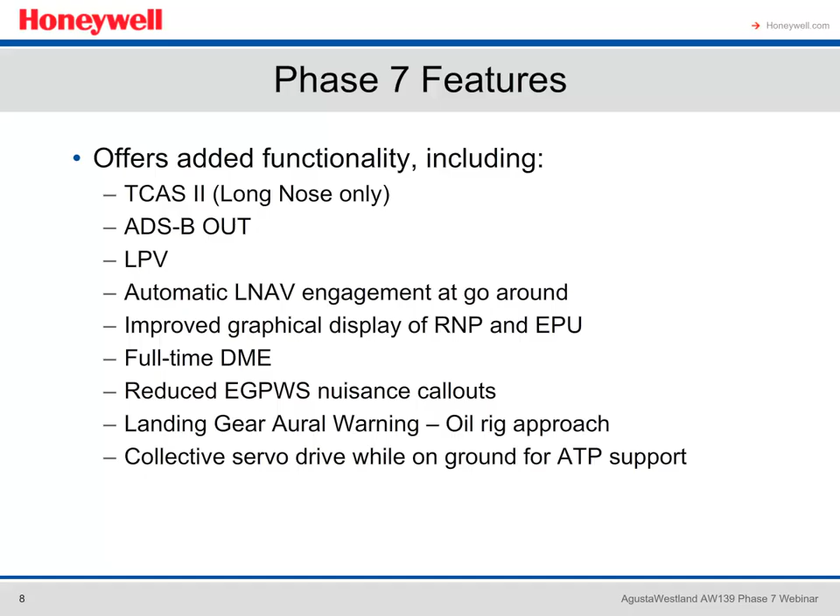Now let's discuss new features as well as improvements with Phase 7. In this section, I'll discuss TCAS 7.1 or TCAS-II, which is an option with the Phase 7 upgrade and only available for the long-nose version. ADS-B out, LPV approaches in general and how LPV is implemented with Phase 7, new Missed-Approach defaults which provide LNAV coupling at go-around, RNP approaches in general as well as what the improved graphical display for Phase 7 looks like, and the Symbology, full-time DME, changes to default callouts for EGPWS, changes to the landing gear aural warning, and changes which will aid maintenance checks by use of the collective on the ground.

Let's start then with TCAS-II, otherwise known as TCAS 7.1. To review, TCAS is an independent airborne system for coordinating traffic separation. It is primarily designed to be a backup to ATC. TCAS detects unsafe traffic conflicts with other transponder-equipped aircraft and displays their symbology on the multifunction display, or MFD. Keep in mind that it only detects other aircraft with transponders installed and on, and therefore will not display any aircraft which is not properly utilizing its transponder. Finally, TCAS-I refers to a system which only displays traffic advisories, whereas TCAS-II provides resolution advisories.

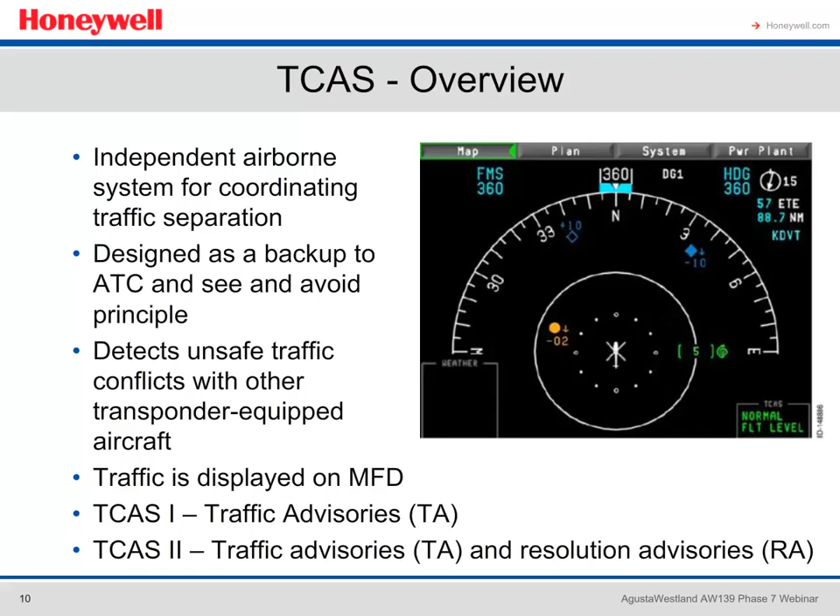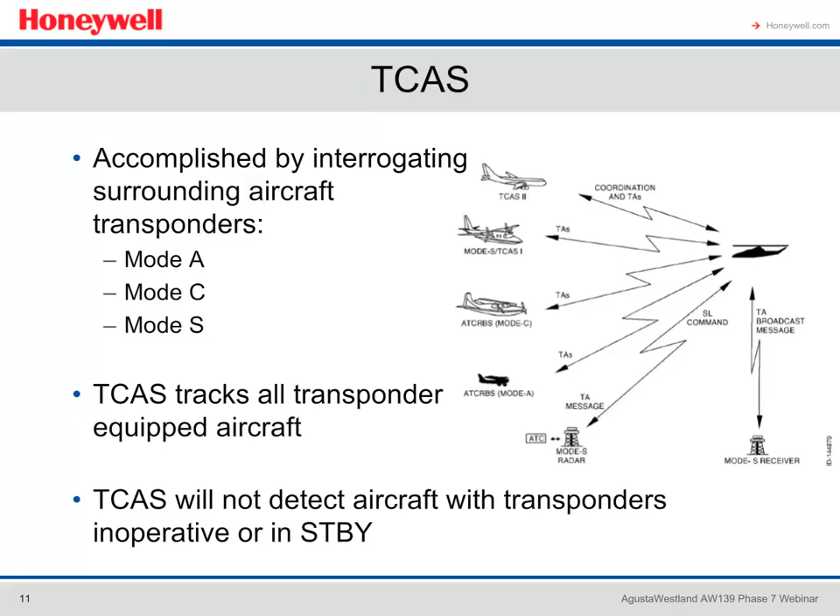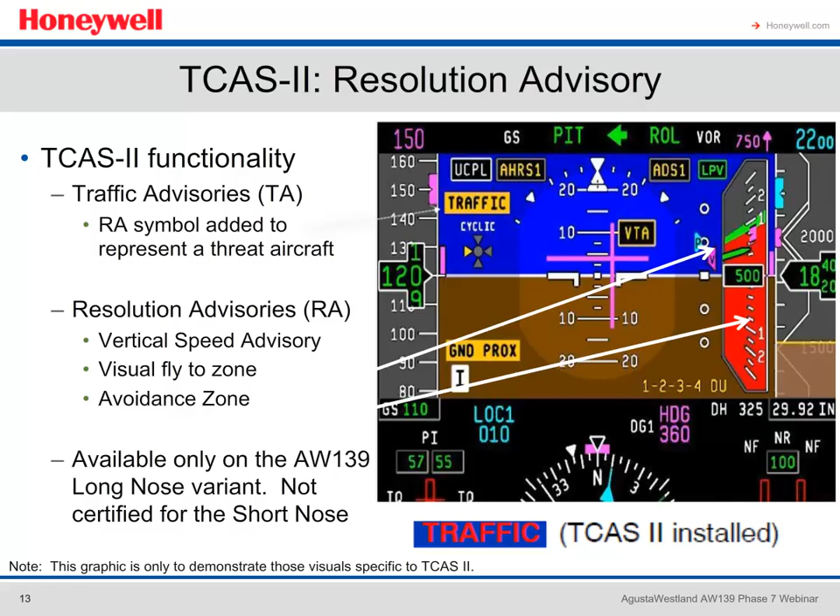Of course, the pilot will still receive traffic advisories and alerts as depicted from TCAS-I. But with TCAS-II, a resolution advisory will be visually depicted in a color scheme on the vertical speed tape to the right of the PFD. The red colored area denotes the avoidance zone, while the green colored region indicates the fly to zone. TCAS-II for the AW139 is only available for the long-nose version, since it is not certified on the short-nose variant.

The vertical speed digital readout is not displayed when a TCAS resolution advisory is present. You probably noted that the previous slide showed both. That's a file photo from our pilot guide and is a demo picture which will show all the PFD advisories in Symbology at once, not depicting an actual scenario.

There are two types of resolution advisories. A preventive resolution advisory instructs the pilot to avoid certain deviations from the current vertical speed. A preventive up advisory displays a red down avoidance zone from the bottom of the vertical speed tape.

A corrective resolution advisory instructs the pilot to deviate from the current vertical speed to avoid the intruder. A corrective down advisory displays a green fly-to band at the down advisory's recommended descent rate, and a red up avoidance extends from the top of the fly-to band to the top of the vertical speed tape.

It is possible to have a preventive down advisory and a preventive up advisory at the same time. For simultaneous up and down preventive advisories, there is both a red up avoidance zone and a red down avoidance zone, with a green space between the two zones which looks like a fly-to band.

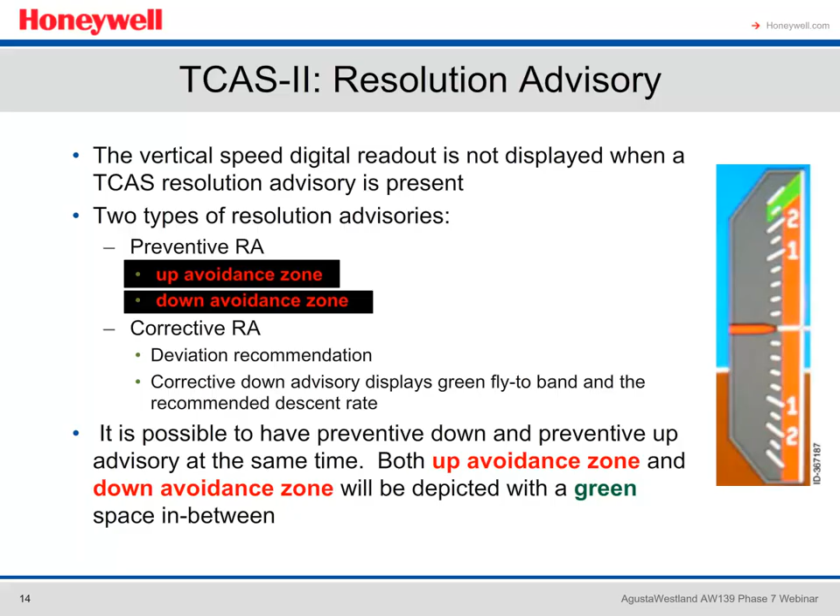When an intruding aircraft is detected, aural and visual traffic advisory alerts are displayed. Traffic is displayed in the upper left-hand corner of the attitude sphere as shown. The traffic display flashes for the first 6 seconds and then shows steadily.

With TCAS-II, alert displays are related to resolution advisories. When a resolution advisory is active, a red traffic annunciator is displayed in the upper left corner of the sphere. With the red and amber traffic annunciators active, the red traffic annunciator is displayed. In other words, the resolution advisory takes priority on the PFD.

When TCAS-II is installed and the transponder mode is TA only, A white TA only annunciator is displayed. When the vertical speed fails, an RA fail annunciator is displayed beneath the other TCAS annunciators. Additionally, if TCAS fails, the amber or red traffic annunciator will not be displayed and the TCAS fail annunciator will appear.

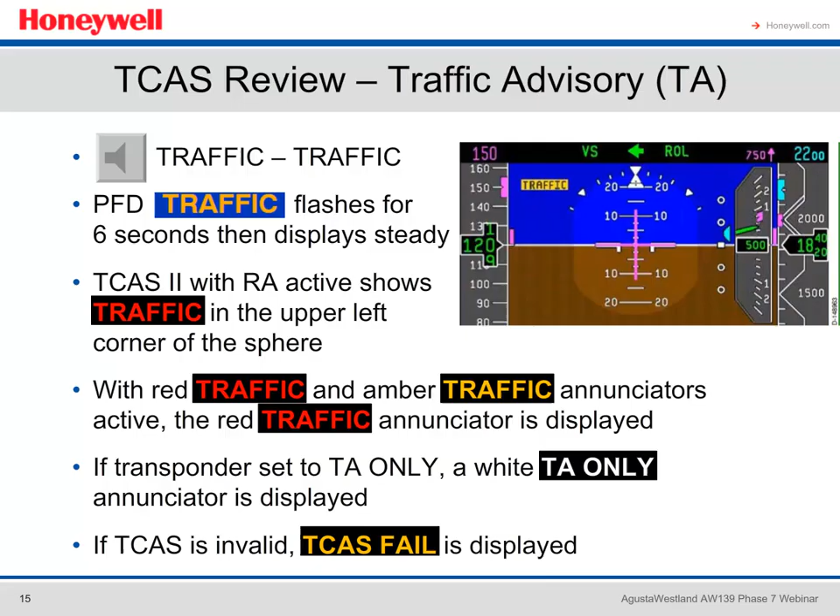Since we're on the subject of TCAS, let's review TCAS in general on the MFD in the next few slides. TCAS traffic settings are displayed in the lower right corner of the MFD map. They provide a TCAS target filter status: normal, above, below, or expanded.

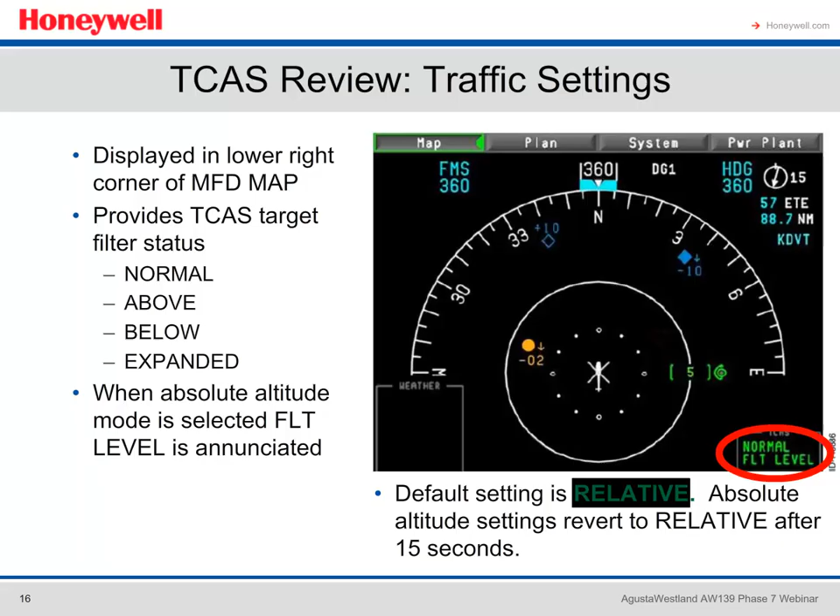When the absolute altitude mode is selected, flight level is annunciated. The default setting is relative. Absolute altitude settings will revert to relative mode after 15 seconds.

When a TCAS traffic advisory is indicated, the cursor moves to the MFD, specifically on the map menu button, and if the map window is opened, a traffic advisory appears as a filled amber circle as depicted.

The 2-mile range ring is displayed when traffic is selected on the MFD. As depicted on this slide, a ring of 12 small circles defines the 2-mile radius around the helicopter icon. Within that 2-mile radius ring are additional dots arranged at each clock hour position.

This graphical TCAS arrangement is removed when the MFD map range is 25 nautical miles or greater. Additionally, for TCAS-II, you will note that the TCAS window does not range in using the automatic scale expansion seen with TCAS-I when the traffic advisory penetrates the 2 nautical mile range ring on the map display. This is intentional and per the requirements of DO-180.

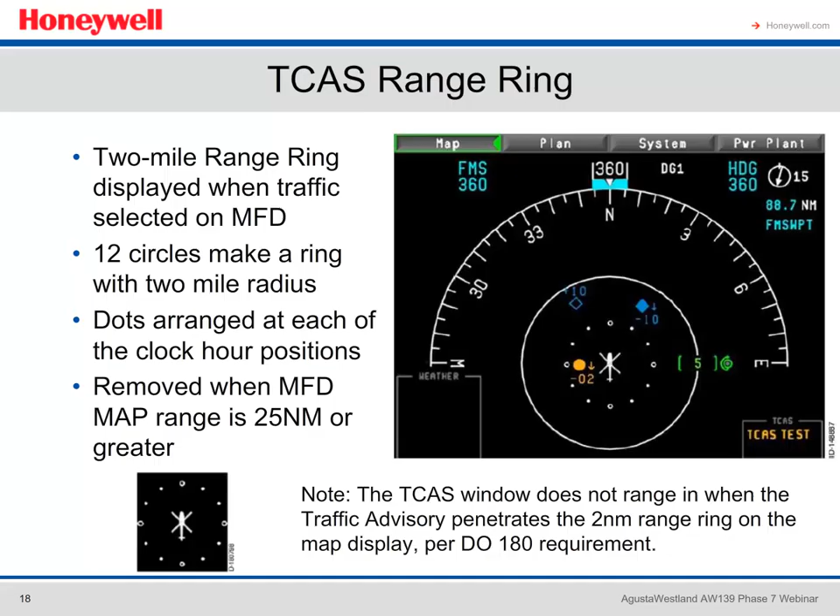Now let's take a quick look at TCAS target type symbology. The orange filled-in circle is a traffic advisory indicating the intruding aircraft is potentially hazardous, with the closest point of approach at 15 to 30 seconds.

The filled-in blue diamond means proximate traffic, or PT, indicating the intruding aircraft is within plus or minus 1,200 feet and within a 5 nautical mile range. Finally, the empty blue diamond means other traffic, or OT, indicating that the intruder aircraft is greater than plus or minus 1,200 feet or beyond a 5 nautical mile range.

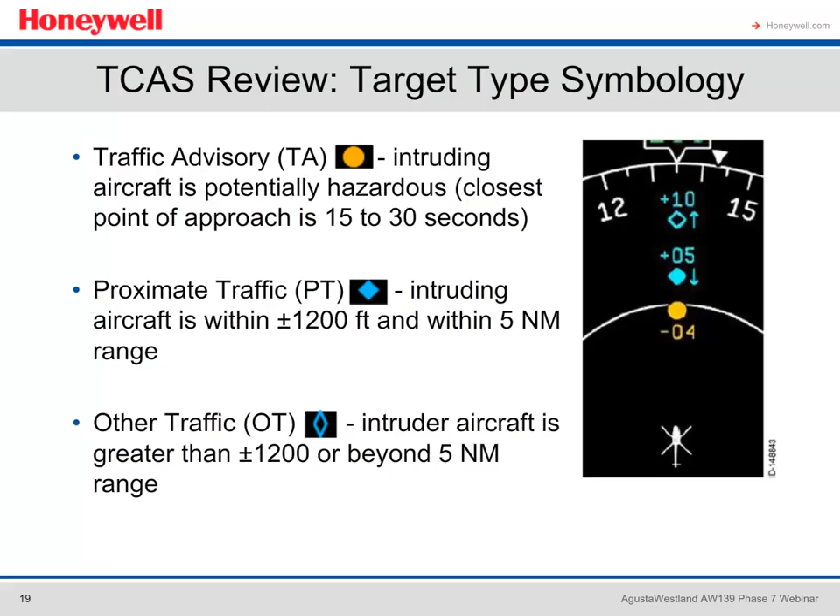A no-bearing target readout will show as amber data located above the TCAS status window. This means that the intruder with a transponder is received, but TCAS is unable to determine the bearing. In the no-bearing target readout, the first line contains the highest priority no-bearing target data, and the second line contains the second highest priority no-bearing target.

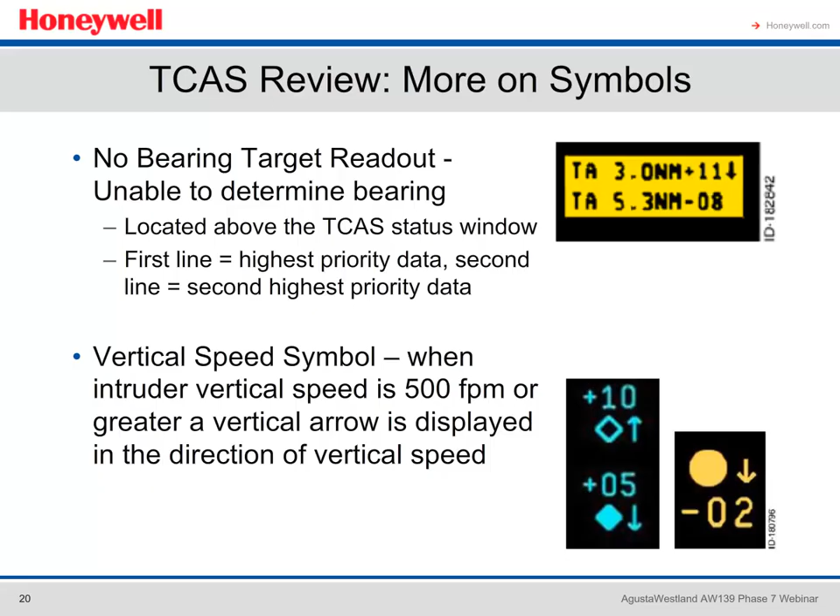Down at the bottom of the slide, we see the vertical speed symbol, which is indicated when the intruder aircraft's vertical speed is 500 feet per minute or greater. This is displayed as a vertical arrow in the direction of the vertical speed. This slide concludes the TCAS portion of this webinar.

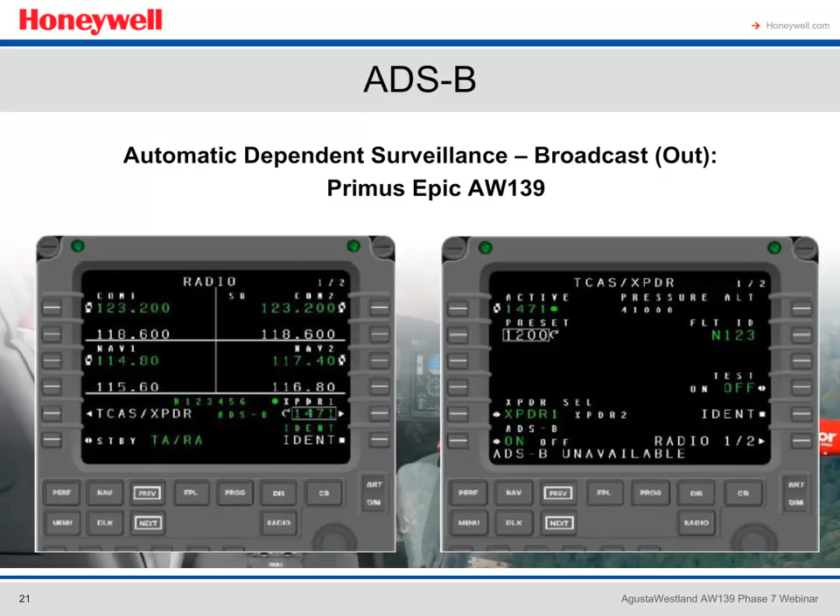So let's now change gears and talk about ADS-B. In Phase 7, the AW139 will be equipped with ADS-B Out. ADS-B Out is part of the FAA's mandates as well as that of many other international regulatory agencies. So in the coming slides, we'll discuss what ADS-B is.

Automatic Dependent Surveillance Broadcast, or ADS-B, is a function that allows an aircraft in the air or on the ground, or for that matter any other vehicles including surface vehicles, oil rigs, etc., to automatically broadcast information without interrogation from a remote source such as radar or TCAS.

It is dependent surveillance in the sense that the information depends on a suitable GPS position source. This information is used by the Air Traffic Management System to surveil and control the aircraft in the airspace. As the name implies, the information being output is continually broadcast to anyone with a receiver. ADS-B Out is the transmission of this information at 1-second intervals.

ADS-B uses a dual link system: UAT, or Universal Access Transceiver, and Mode S, or 1090 ES for extended squitter. UAT is intended for general aviation. It reduces 1090 congestion and the cost of equipage. UAT broadcasts on 978 MHz and is only used in the United States, below 18,000 feet.

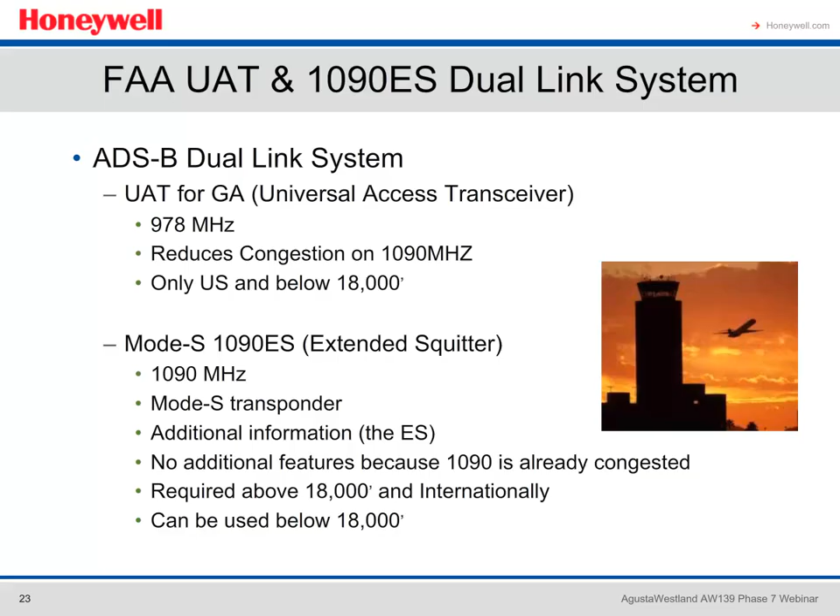The 1090 MHz extended squitter uses the extended Mode S transponder. It can be used in all airspace and will be required above 18,000 feet and internationally. So in summary, the system transmits ADS-B out messages only. It does not receive messages. ADS-B is certified to DO-260B on the AW139 to comply with the FAA 2020 mandate.

ADS-B equipped ATC facilities, using ADS-B in, can see radar-like displays of traffic updates in near real time, and the updates do not degrade with distance or terrain. It provides broadcast data with respect to aircraft position, aircraft state data, and aircraft vector data of high frequency and accuracy over the 1090 MHz transponder, and the only action the pilot performs is to verify the system is on. That will conclude the ADS-B section of this webinar.

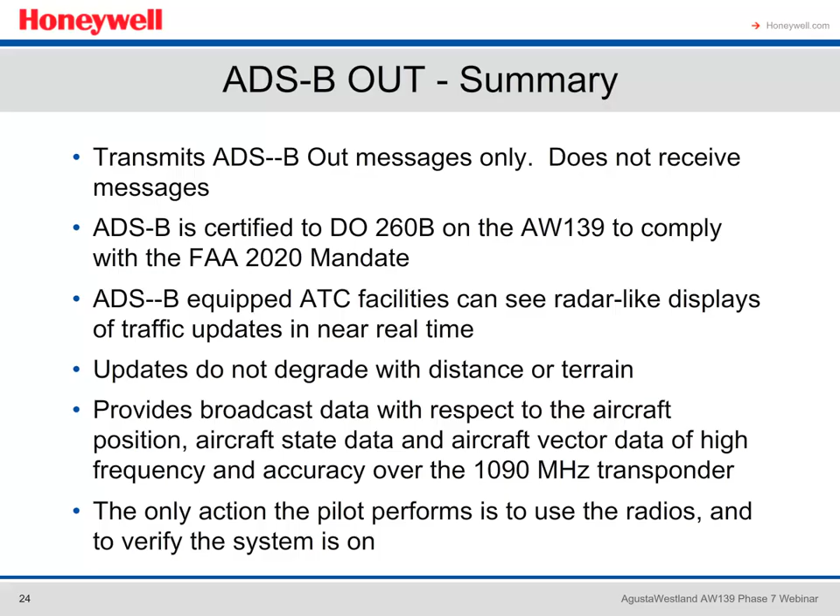In this section, I'm not only going to discuss the LPV capabilities of the helicopter, but provide a brief overview of the system upon which it relies. First, we'll discuss that ground and satellite-based system, then LPV approaches in general, and after that we'll see what they look like in the cockpit as we fly an LPV.

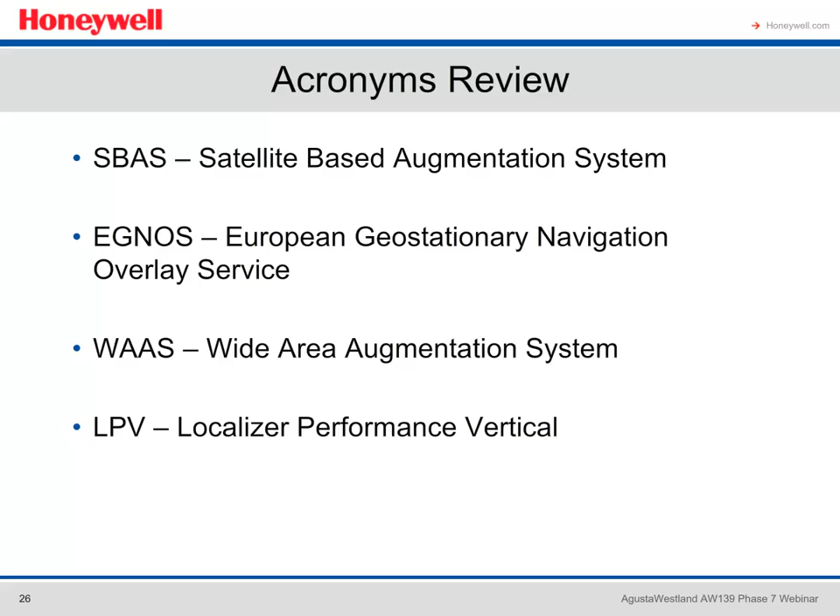So let's look at some important acronyms you'll see time and again. SBAS refers to the Satellite-Based Augmentation System. That is the ICAO term for the regionally specific versions like EGNOS, the European Geostationary Navigation Overlay Service, which is the SBAS for Europe, WAAS, the Wide Area Augmentation System, which is the SBAS for the United States, and of course other regions have theirs, Japan's MSAS for example. Finally, LPV stands for Localizer Performance Vertical.

SBAS, known in the U.S. as WAAS, was jointly developed by the U.S. Department of Transportation and the FAA. It was part of the Federal Radio Navigation Program circa 1994 to provide performance comparable to Category 1 ILS for all appropriately equipped and certified aircraft. The FAA and the aviation community wanted to use the global positioning system for precision approaches, saving money on ground infrastructure and allowing precision approaches to many more runways.

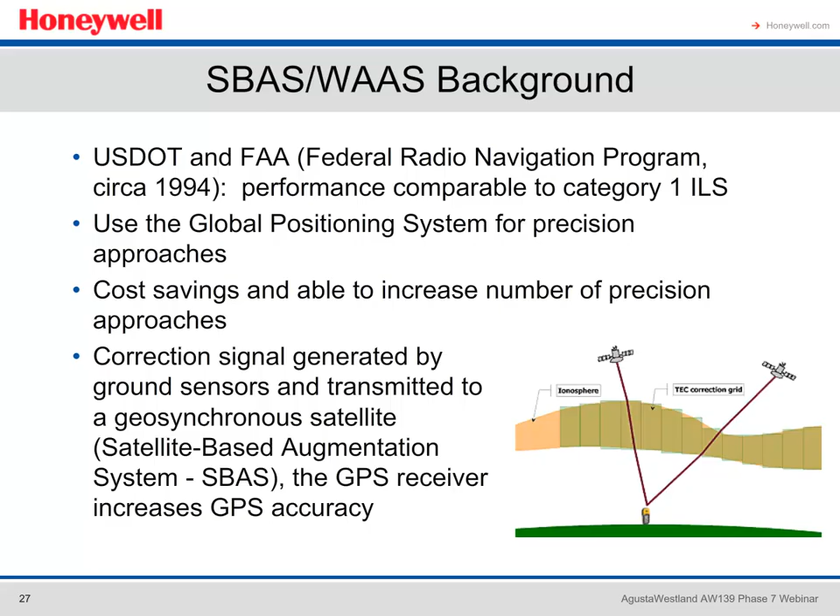To increase the accuracy of GPS in order to support precision approaches, the solution has been to use a correction signal generated by ground sensors and transmitted to a GPS receiver. More specifically, that solution is to transmit the correction signal from a geosynchronous satellite called now a Satellite-Based Augmentation System, or SBAS.

In addition to being able to do RNAV GPS approaches to lower minimums, the other benefits to SBAS include eliminating the predictive RAIM check requirement by EASA's AMC 20-4A and FAA's AC 90-100A. The system is 10 times more accurate than traditional GPS, yielding better position accuracy. The system uses GPS altitude instead of barometric VNAV, which is much more consistent and not susceptible to incorrect altimeter settings, temperature, and altimetry errors. This means the pilot can ignore temperature limitations when conducting an LPV approach.

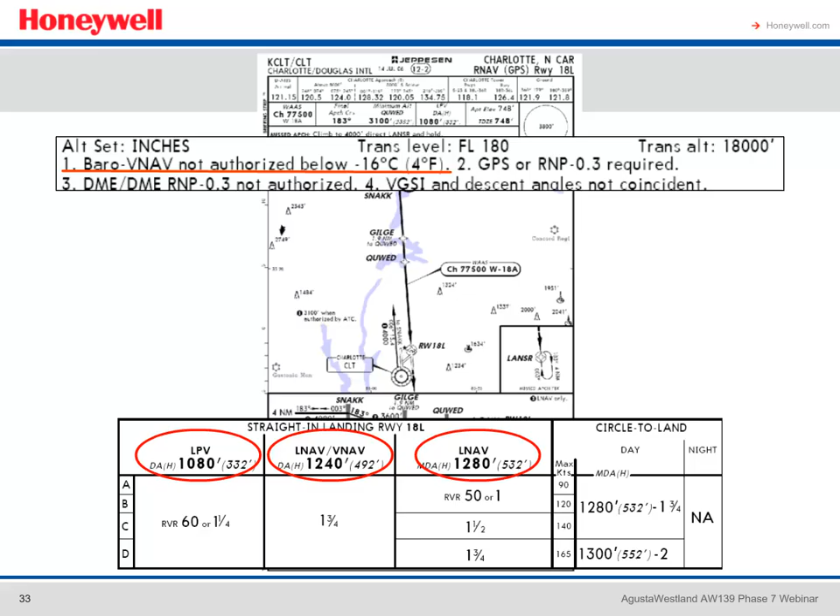Here is an approach plate for Charlotte, North Carolina, RNAV GPS runway 18 left. It shows 3 different published minimums: the LPV, the LNAV VNAV, and LNAV only minimums. In order to use the LPV minimums, the aircraft must be equipped and authorized to use SBAS. If conducting the approach to LPV minimums, the temperature restriction does not apply. If conducting the approach to LNAV VNAV minimums, the temperature restriction for barometric VNAV must be followed.

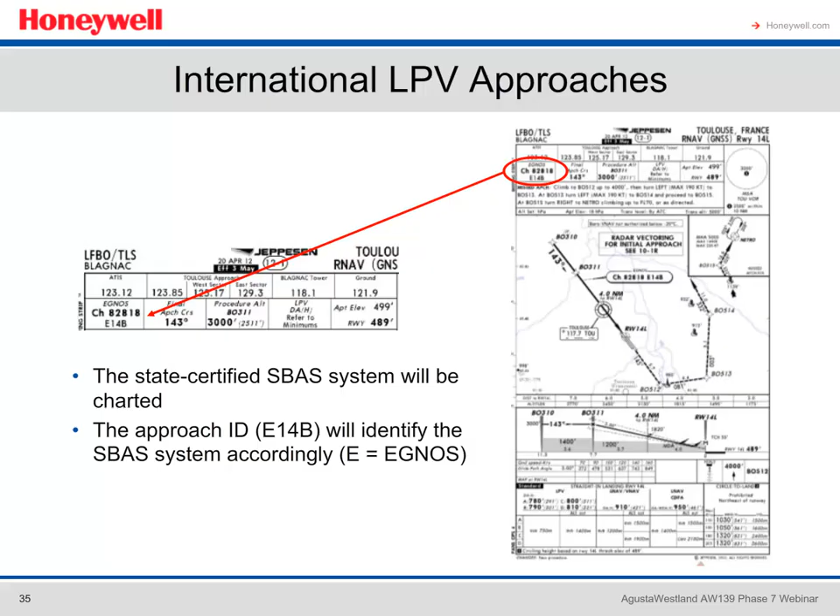Note in this slide of an approach to Toulouse, France, that European GPS approaches with LPV minimums will have slightly different formatting, but the LPV nomenclature will be consistent.

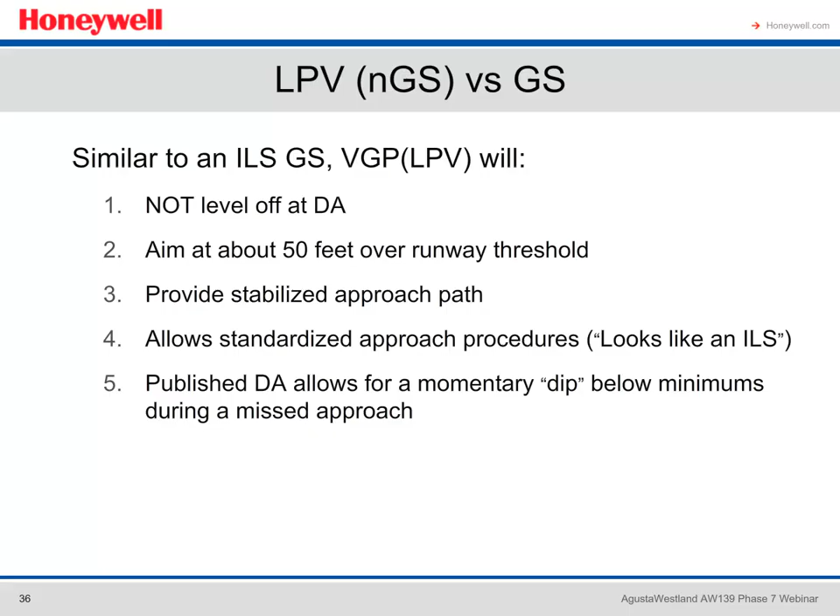The VGP LPV is very similar to an ILS glide slope. Just like the ILS, VGP LPV glide slope, known as the NGS or pseudo glide slope, will not level off at decision altitude. It'll aim about 50 feet over the runway threshold. It will provide a stabilized approach path. It allows standardized approach procedures and looks like an ILS, and has a published decision altitude which allows for a momentary dip below minimums during the missed approach.

LPV approaches in general allow for the following capabilities. They provide the highest precision GPS SBAS enabled instrument approach procedures currently available without specialized aircrew training requirements, such as the RNP AR. The landing minima are similar to those in an ILS, with a decision height of 200 feet and visibility of a half a mile.

The landing minima are similar to those of an ILS, with a decision height of 200 feet and a visibility of 1/2 mile. And they are designed to provide accuracy of 2 meters and availability above 99%.

Now let's talk about LPV approaches in the 139 specifically. The following are some key points about setting up an LPV in the AW139. As you will see, when selecting RNAV approaches in the FMS, LPV is the default approach minima type. The FMS navigation database contains the final approach segment, or FAS, data block associated with the LPV minimums.

That FAS data block is transmitted from the FMS to the GPS SBAS landing system sensor unit, referred to as the GLSSU. It computes aircraft lateral and vertical deviations for the final approach segment. With LPV enabled, the GLSSU displays LPV deviations and distance to the landing threshold point, or the LTP, on the primary flight display known as the PFD, and provides such information to the flight director in lieu of ILS guidance.

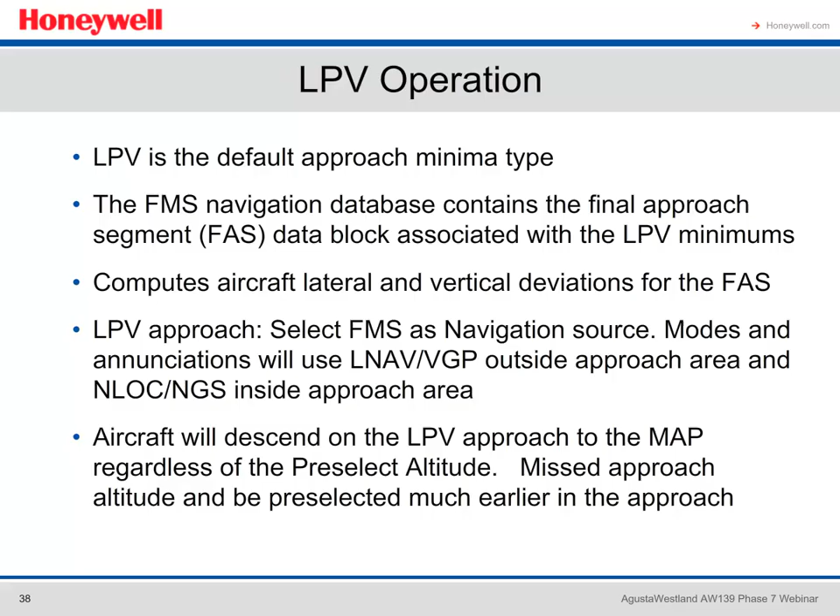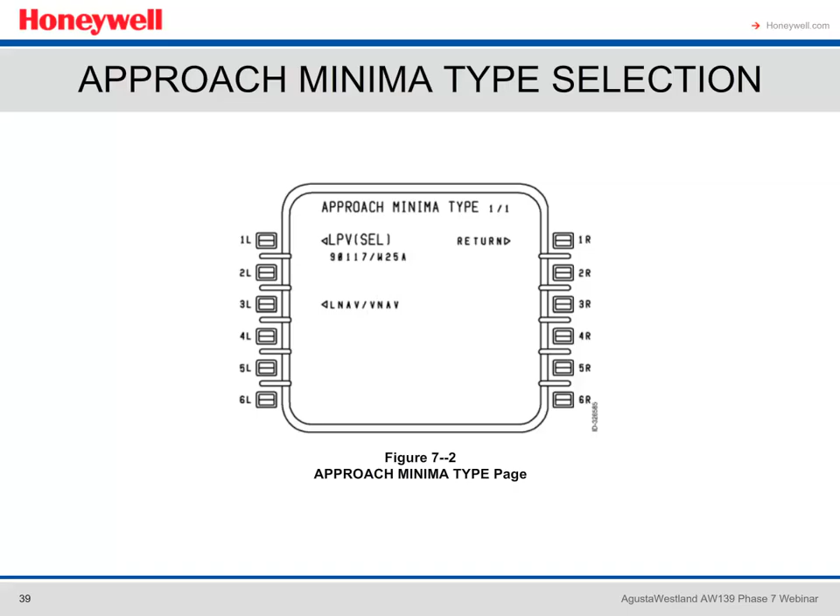Now let's take a brief look at setting up the approach. As mentioned earlier, and as you can see in Figure 7-2 from the AFCS Pilot Guide for the AW139 Phase 7, when selecting RNAV as the approach type, the approach minima type page will show the LPV option as the default under line select key 1L.

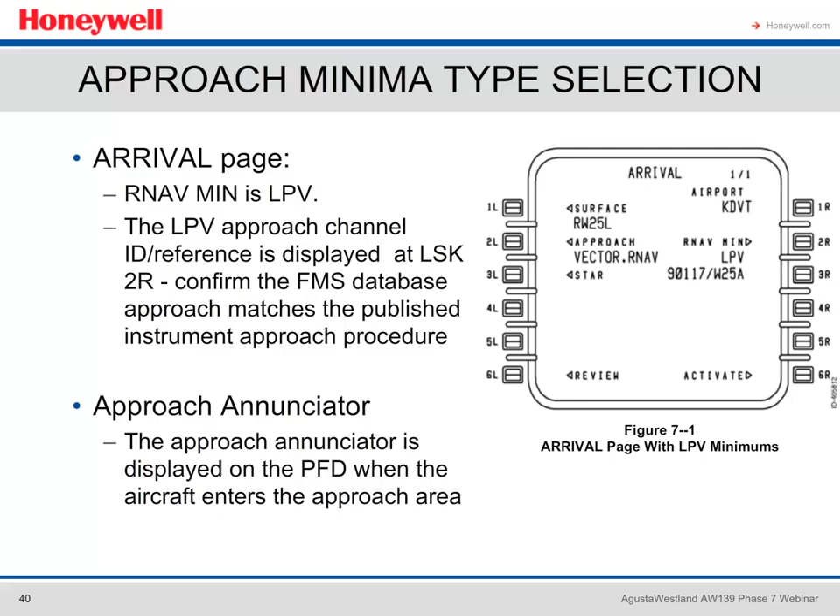As you will see in the coming slides, the approach annunciator is displayed on the PFD when the aircraft enters the approach area. We'll cover setting up the LPV approach again once we get to the section of flying the LPV, but first, let me go through some more information about how the LPV works with this aircraft.

The LPV uses GPS data for both lateral and vertical guidance. As shown previously, select the LPV approach on the FMS. As with other approaches on this FMS, you must select either approach or DCL on the guidance controller in order to arm the approach.

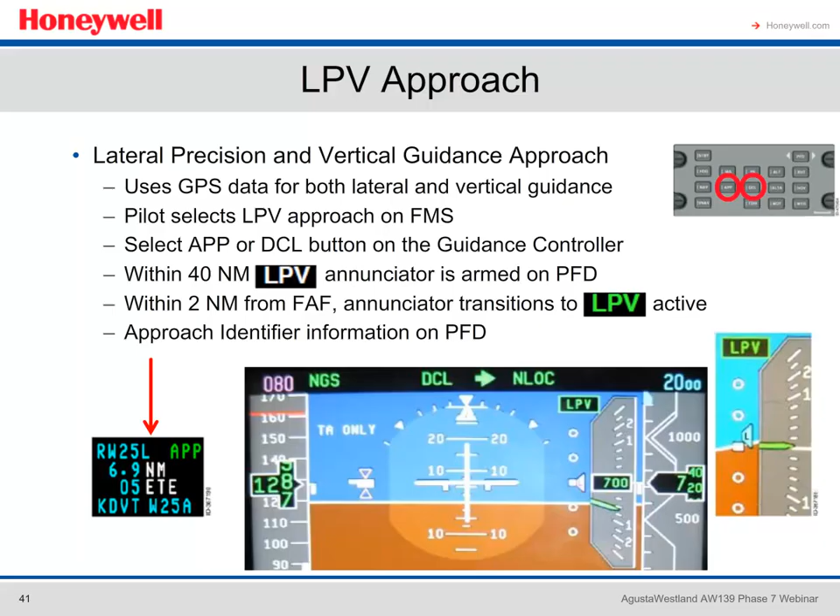Within 40 nautical miles, the LPV annunciator is armed on the PFD, showing white letters on a black background. Within 2 nautical miles from the final approach fix, the annunciator transitions to LPV Active, indicated by green letters on a black background. Also note the approach identifier information on the PFD. It's another opportunity to confirm you have the correct approach programmed into the FMS.

Let's do a quick look at the approach indications and related parameters. You'll see the color coding is consistent with other approach modes. The LPV is armed, indicated by white letters, when the aircraft is within 30 nautical miles of the landing threshold.

There is a valid final approach segment, or FAS, data block loaded into GPS, and the related SBAS system is operational. LPV is active, indicated by green, when a valid final approach segment data block is loaded in one of the 2 GPSs and the FMS is using GPS calculated final approach segment deviations to determine guidance.

LPV is unavailable, which is indicated by amber, up to 30 nautical miles of the landing threshold when conditions exist that would prohibit descending to LPV minimums during an approach. The following are conditions that can cause it to activate.

A warning of a loss of SBAS corrections after the LPV approach has been loaded, or warning of excessive lateral or vertical deviation, which is 2 dots, from the approach flight path after passing the final approach fix. An LPV unavailable CAS message will appear if the system is unable to perform the LPV.

The white LPV symbol indicates the system is sourcing information from the FMS for navigation. The green LPV symbol indicates sourcing from the GPS. And the amber LPV symbol indicates the system is unavailable and is sourcing the FMS for all information.

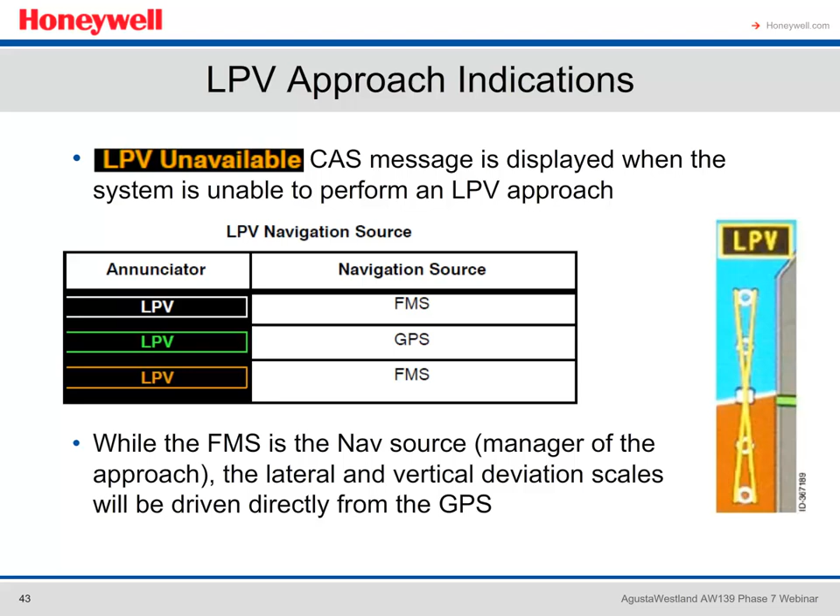If the LPV sourcing data is lost, you'll see an LPV unavailable CAS message, amber LPV display on the PFD, and an amber X on the right side of the PFD as depicted.

Once the aircraft is within 2 nautical miles of the final approach fix, the LPV Active or green annunciator appears on the PFD. Lateral and vertical deviations now change from FMS to GPS source pseudo ILS deviation signals.

NLOC, or the pseudo localizer, is annunciated as the lateral flight director mode. The NLOC mode arms after LNAV is captured and localizer capture criteria is met. LNAV disengages and NLOC transitions from armed to captured.

The approach annunciator, APP or DCL, is displayed to the right of the waypoint identifier. And finally, a small L is displayed inside the vertical deviation pointer showing the aircraft on the glide path, similar to an ILS glide slope.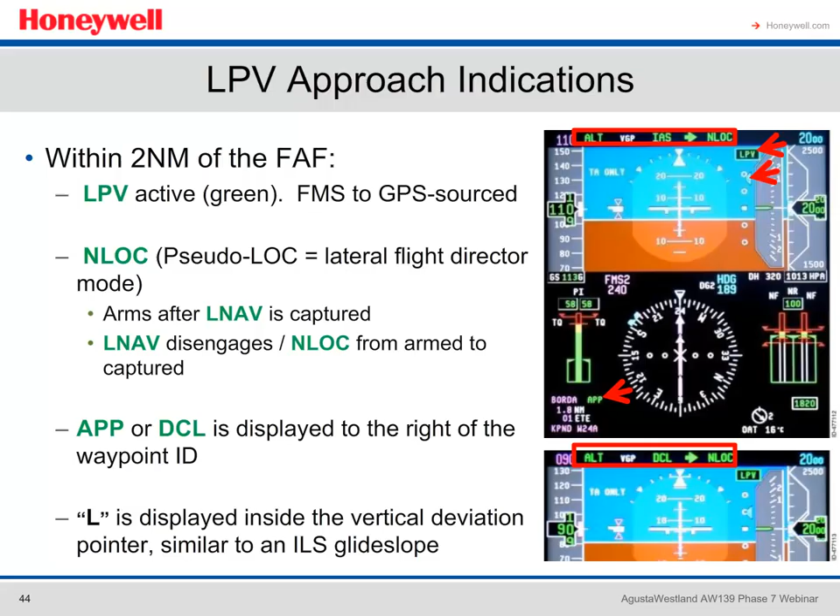NGS, or the pseudo glide slope, is the active collective flight director mode when the following occur: when NLOC is captured, when the glide slope capture criteria is met, and after VGP disengages.

As the LPV approach continues and the aircraft approaches the runway threshold, a transition to a radio altitude of 50 feet is initiated and a 50-foot hover is held.

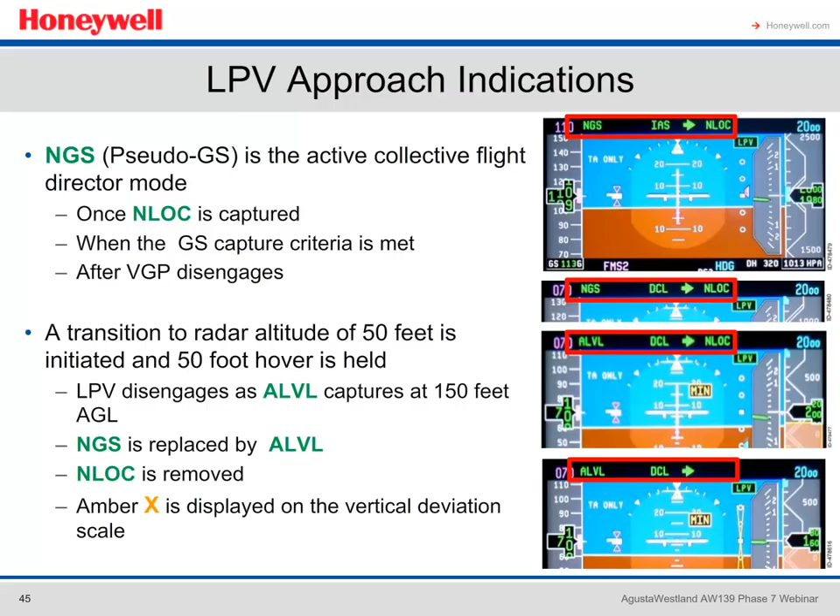When the flare maneuver has begun, LPV is disengaged as auto level captures at 150 feet AGL. NGS is replaced by auto level. However, you'll normally see NLOC disappear at about 70 to 80 feet AGL. And finally, an amber X is displayed on the vertical deviation scale.

Concerning LPV abnormal indications: if the GPS is unable to perform the approach, the LPV annunciator is replaced with an amber LPV. An amber X is displayed on the vertical deviation scale as well, and the airport ID and approach ID will flash amber. In the slide example, you can see the WAAS identifier W24A to the right of the airport identifier KPND, and a CAS message indicating 1 or 2 LPV unavailable is displayed.

In this case, the flight crew should either terminate the approach or, if in the terminal area, change the approach minima type to LNAV VNAV and use LNAV VNAV or LNAV minimums as appropriate, or choose to fly another approach. Note that the 1 or 2 LPV unavailable CAS message is not displayed below 80 feet AGL.

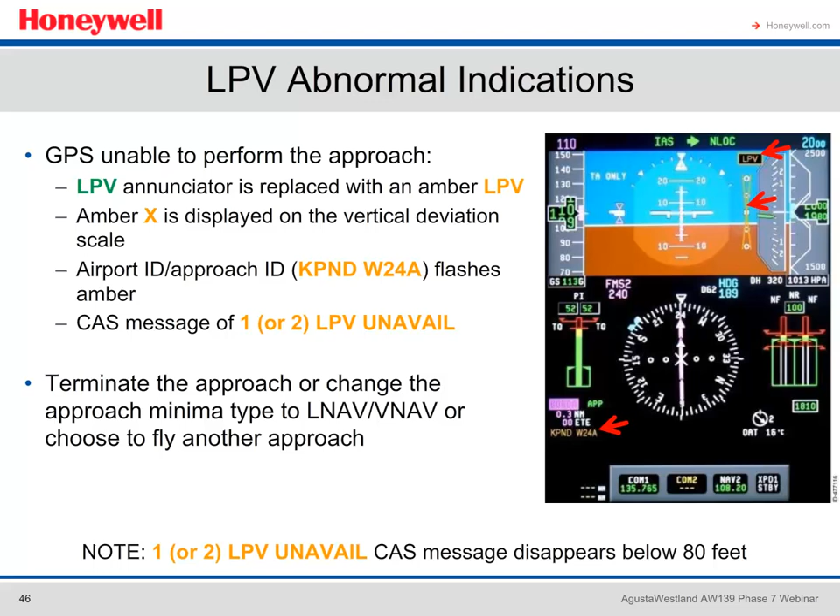For a missed approach with LPV, the pre-select altitude can be set to the first missed approach procedure altitude, and the aircraft will descend to the missed approach point without pilot input. As I mentioned previously, the LPV vertical guidance comes from the final approach segment data block.

Activating missed approach automatically engages LNAV and is initiated by either pushing the go-around button on the collective control grip, selecting missed approach on the CDU, or inputting a direct-to for a non-approach waypoint.

Following a missed approach command, the LPV annunciation is removed and the airport ID and approach ID are replaced with the RNP value, and the lateral and vertical deviation pointers are sourced from the FMS.

Now I'll go through setting up an LPV approach and demonstrate what you will see on the primary flight display as the aircraft captures the VGP. Within 2 nautical miles of the final approach fix, VGP drops and LPV is captured.

In our scenario, we're going to fly an LPV approach to Deer Valley, or KDVT, specifically the RNAV GPS to runway 07 right. Here are the approach details. The LPV minimums are 319 feet AGL or 1779 MSL.

We are to be no lower than 3,900 feet MSL at BOLES, and we will follow the glide slope no lower than 2,900 feet MSL at CEGAP, the final approach fix. That means we should be on a VGP coupled approach until approximately 2 miles from CEGAP, the final approach fix.

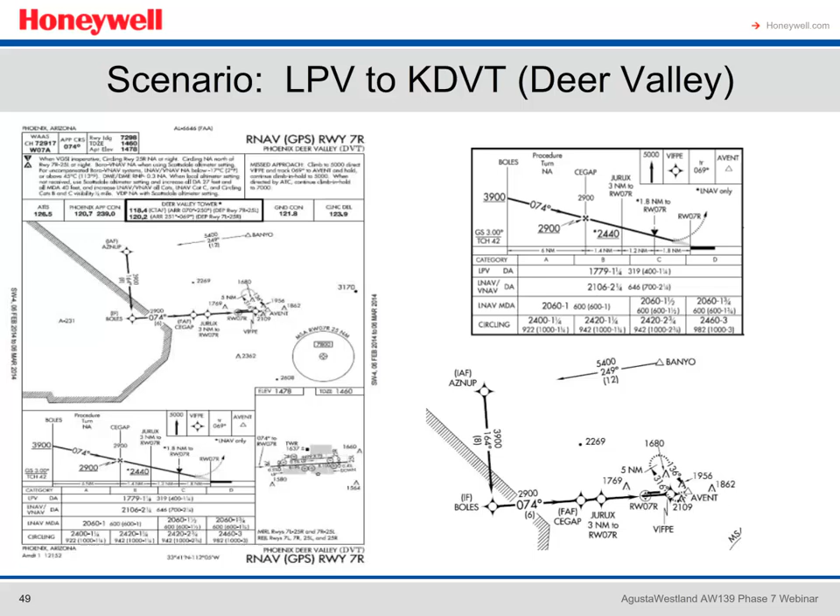This is when you will see the LPV become active, along with NLOC and NGS as VGP and LNAV drop off. Also note from the missed approach procedure that 5,000 feet MSL is the first published altitude.

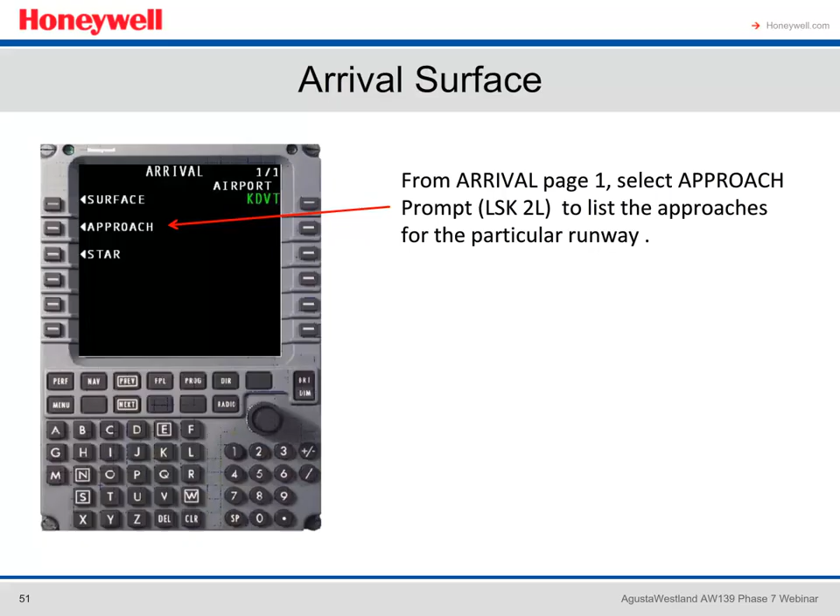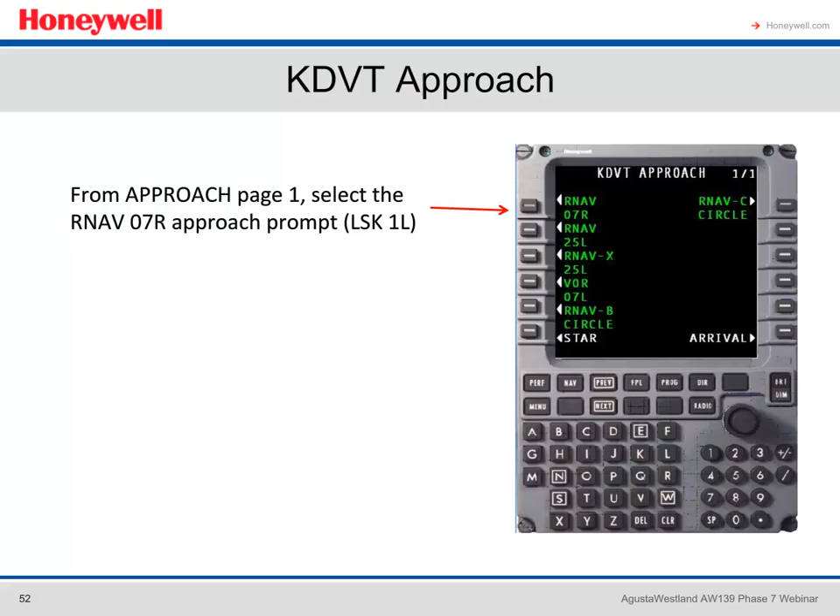Setting up this approach, select Arrival from the nav page 1 of 2 on line select key 6R. Next, from the Arrival page, select the approach prompt at line select key 2L as you confirm you have the correct airport KDVT selected. In the approach page, you see RNAV 07 right in line select key 1L, which is the approach we want to fly for this demonstration.

On the next page, select the point of transition for RNAV 07 right. In this case, we want to select Banyo, line select key 2L.

Finally, select Activate. Note that anytime you have programmed an LPV approach, it is shown first under the RNAV minimums option prompt at line select key 2R. If LNAV or VNAV are preferred, line select key 2R would allow you to change from LPV to another approach minima.

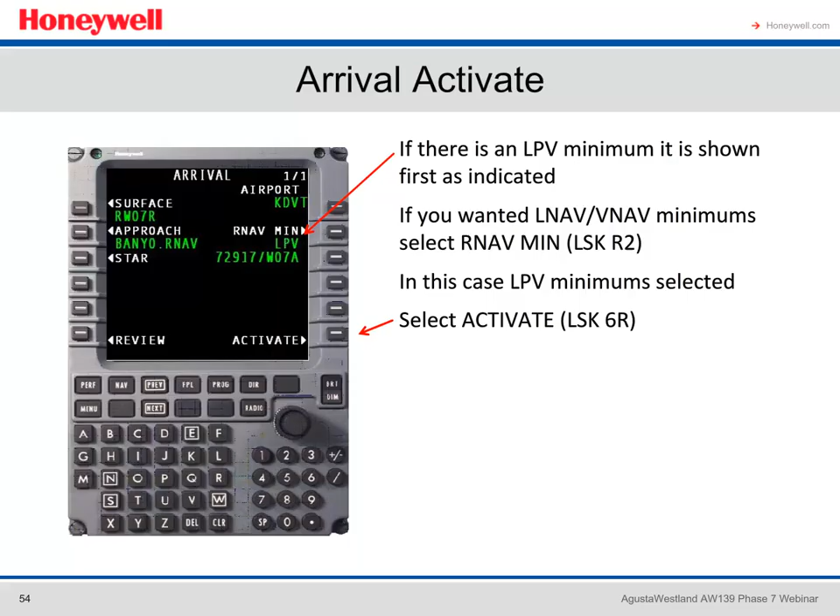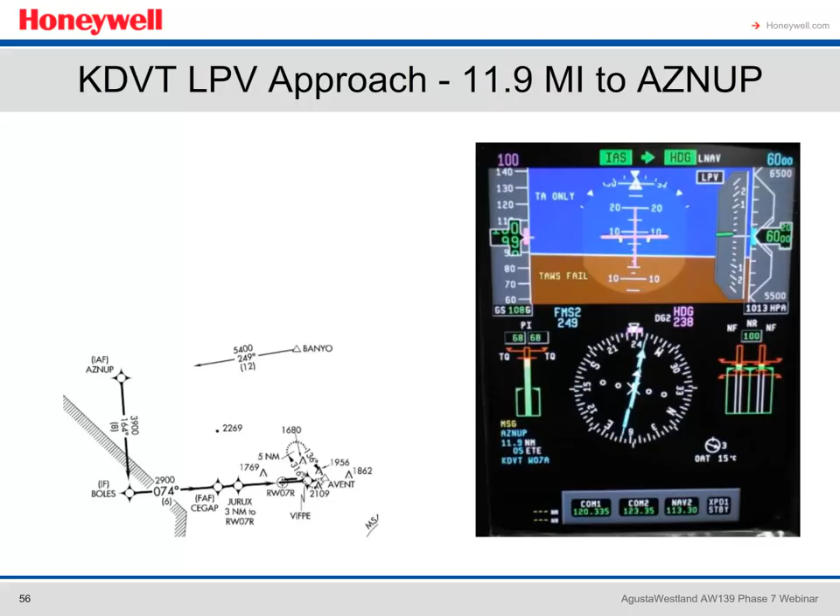Starting out, the aircraft position is 11.9 nautical miles from AZNUP, which puts us just 0.1 nautical miles from Banyo. The cruise altitude was 6,000 feet, and you can see LPV is armed. Airspeed is at 100, and the aircraft will have decelerated to 90 indicated airspeed for the approach. Also note the airport WAAS identifier to confirm again we are on the correct approach.

The aircraft is now 6.8 nautical miles from Boles, and VGP is now armed. LNAV is active, and the airport WAAS identifier information at the lower left of the PFD has turned magenta, confirming the approach is now active. The airspeed is 90 knots, and altitude still at 6,000 feet.

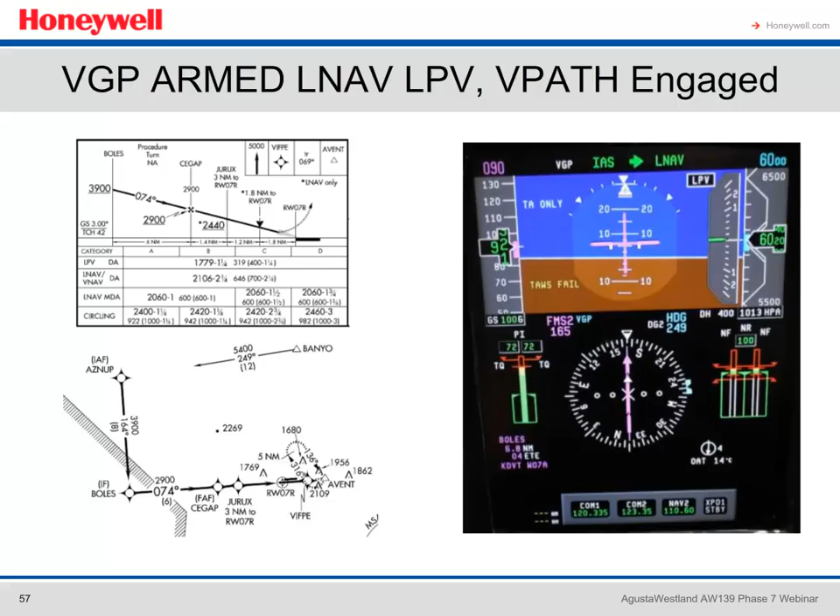As you can see, a decision height of 400 feet AGL has been dialed into the decision height window. Now with the aircraft exactly 6 nautical miles from the final approach fix, CEGAP, VGP is captured, which means the system is now vertically coupled. The system will bring the aircraft into an eventual 3-degree descent on the glide slope.

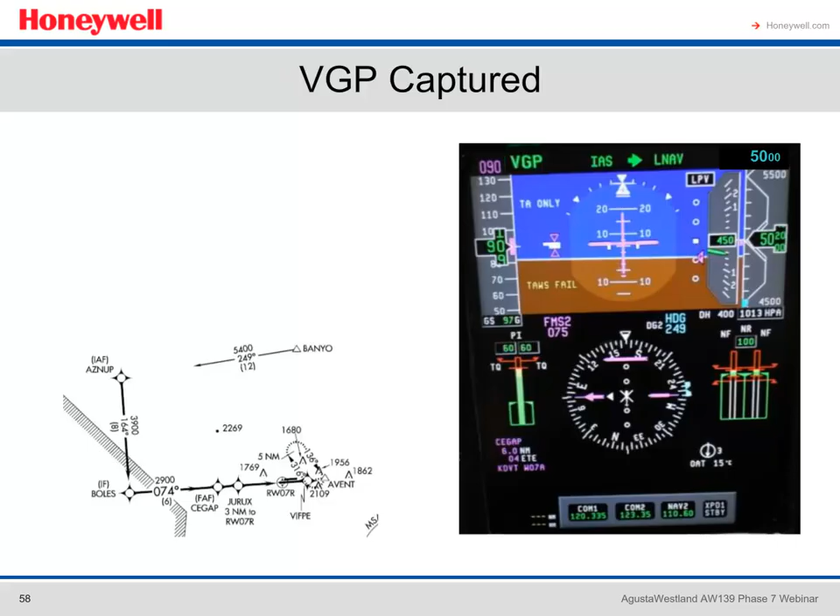The pre-selected altitude can then be set to 5,000 feet, which is the first altitude of the published missed approach. The glide slope indicator now shows a magenta P, and we're descending 450 feet per minute through 5,020 MSL. Having just passed Boles, the aircraft will soon turn left to 074 degrees to CEGAP.

At less than 2 nautical miles, actually 1.8, to the final approach fix, we now see by the reverse video LPV symbol indicating that LPV is in the process of capturing, as is NLOC, the GPS-driven localizer. The glide slope has now converted from VGP magenta, or captured P, to a magenta, or captured L, to indicate the data is now derived from the LPV and the final approach fix database.

Altitude is now 3,420 feet MSL as we continue our descent at 500 feet per minute. A few seconds later, as we have only advanced 0.1 nautical miles, we see LPV captured and VGP is now replaced with a reverse video of NGS.

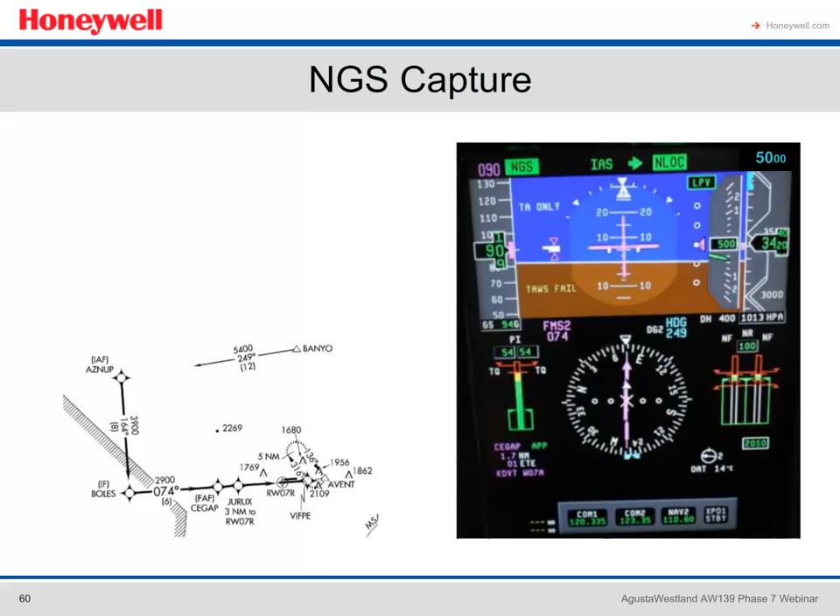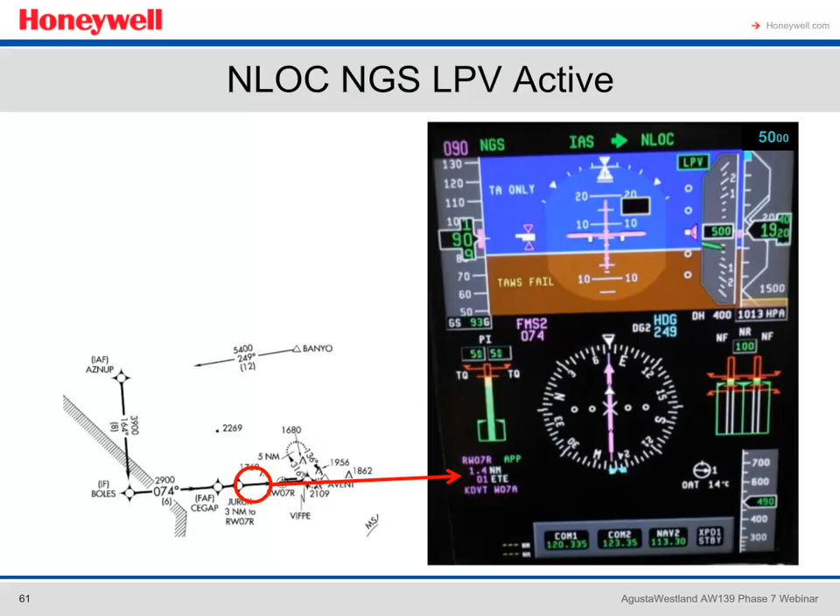0.3 nautical miles later, you can see the PFD with LPV completely active, showing NLOC, NGS, and LPV. As the arrow shows from the diagram, we are now 1.4 nautical miles from the threshold and at the published decision height of 400 AGL. After another only 0.3 nautical miles, the aircraft is 1.1 nautical miles from the runway.

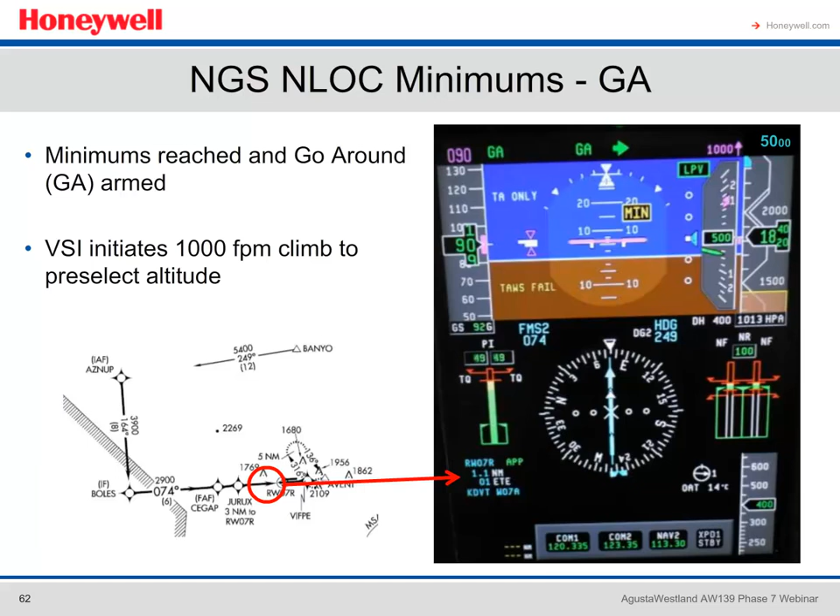The min indication shows an amber at decision height, and the pilot has activated the go-around by either selecting it from the FMS or pressing the go-around button on the cyclic, which automatically initiated a command for a 1,000 feet per minute climb. At that point, all LPV data is dropped, NGS, NLOC, LPV, and replaced with go-around, GA, to advise that the go-around mode has been activated.

Finally, within 0.1 nautical mile from when we pressed go-around, we see reverse video of GA and of LNAV indicating LNAV is now capturing. Once active, the system will provide us with a laterally coupled missed approach procedure. Since vertical is no longer coupled, Alt-A will get us to the first missed approach altitude, since, as you can see, we have 5,000 dialed in already.

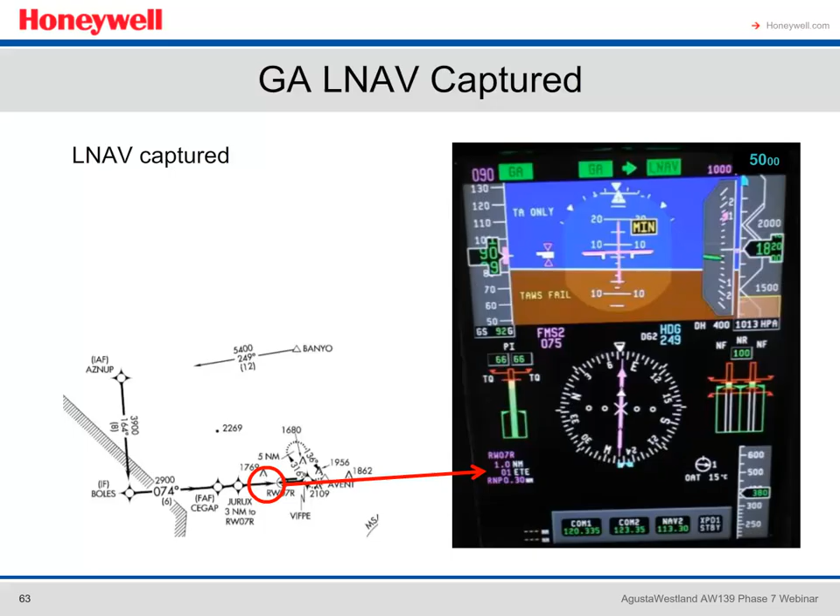Now you've seen the PFD indications for an LPV approach to the missed approach point and LNAV activation with go-around. The following scenario assumes DCL is selected instead of approach in order to demonstrate the visual indications of an approach to runway threshold using the DCL approach mode.

This approach is to runway 33 at Martin State Airport in Baltimore, Maryland. The decision height is 390 feet AGL, and the final approach fix is Cindy.

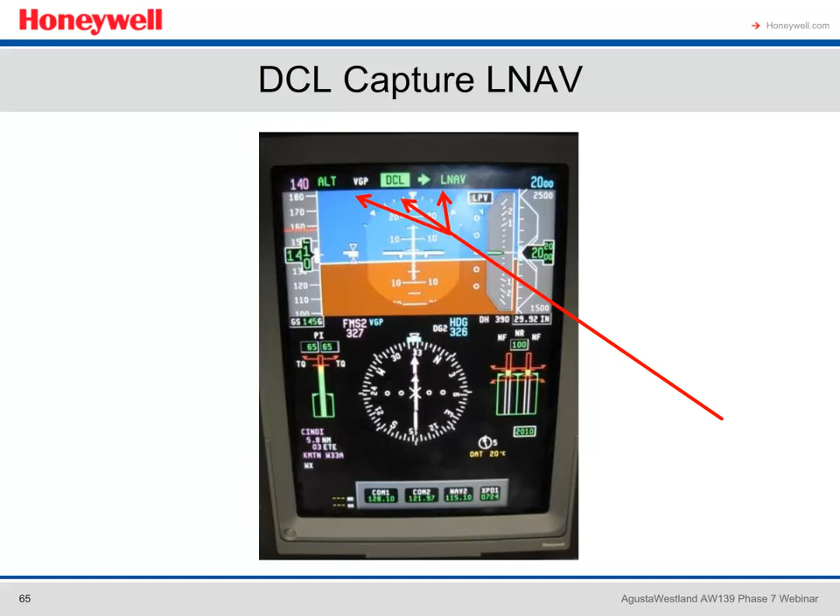The PFD shows we are at 5.8 nautical miles from the final approach fix, CINDI, for runway 33 at Martin State in Baltimore. DCL has been selected instead of approach and is capturing. LPV is armed and LNAV is coupled. Note the WAAS identifier in the lower left of the PFD.

The left side PFD here shows we are now 2.1 nautical miles from runway 33. The LPV approach is active, showing an active decel mode, which set the aircraft to decelerate to a default airspeed of 80 knots, shown in magenta above the speed tape. You can see NLOC, NGS, and a magenta L for the glide slope.

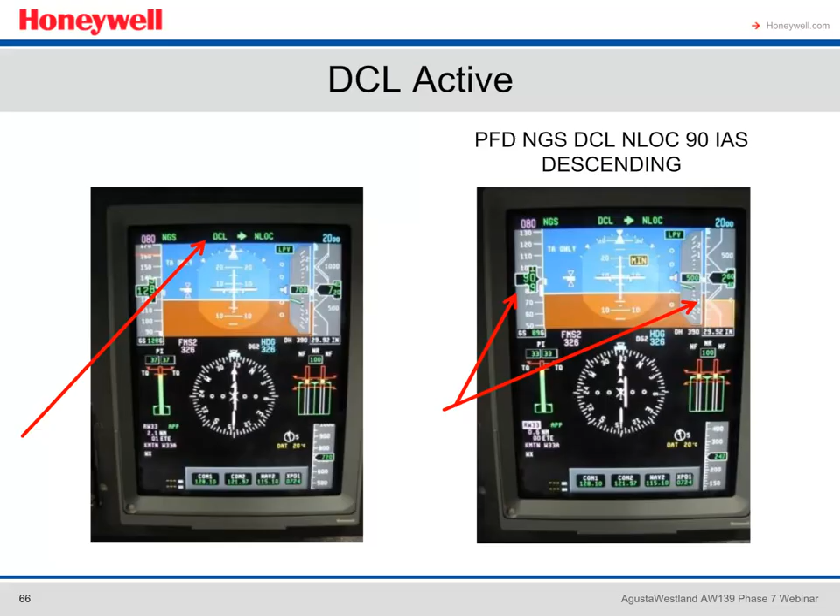The right side PFD shows us 0.6 nautical miles from runway 33 at 247 feet AGL, which is below our decision height of 390 feet. Airspeed shows us decelerating through 90 knots as we get ready for auto level to arm at 150 feet AGL. As depicted in the left side PFD here, the aircraft, already at its target 80 knot decel speed, has gone below 150 feet AGL, engaging the auto level.

Note that NLOC is still engaged and NGS has dropped off. You'll normally see NLOC uncouple around 80 feet AGL. On the right side PFD, the aircraft is at 95 feet AGL. NLOC is still a few feet above the altitude at which it normally disengages, and we are 0.1 nautical miles from the runway threshold. As the approach continues, the aircraft will continue to decel until reaching a hover of 50 feet AGL above the runway threshold.

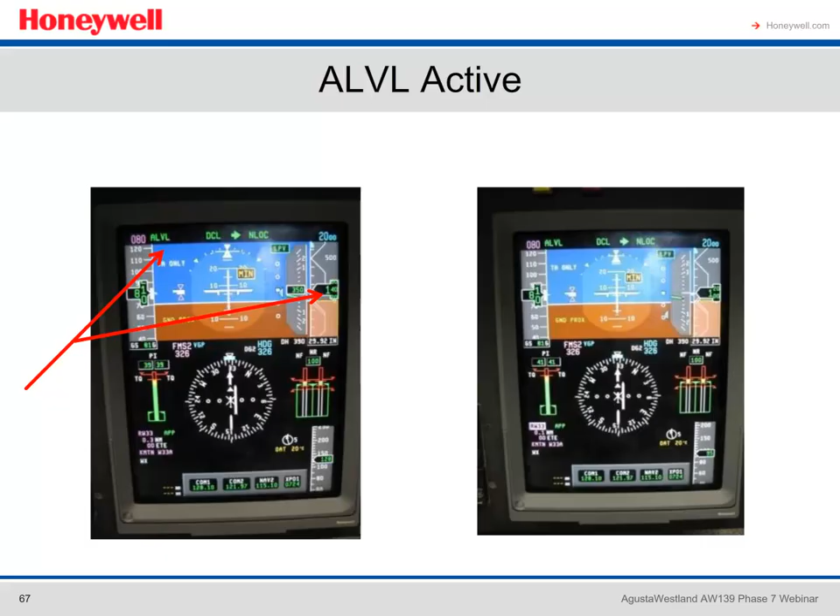In this section, you've seen how LPV appears on the PFD from the initial approach fix through the final approach fix to go around, as well as through the decision height to landing. So let's revisit and discuss a bit more on the LNAV go-around feature.

Prior to Phase 7, the AW139 go-around mode put the aircraft to wings level and dropped all lateral flight director modes, as well as initiating a 1,000 foot per minute climb. With Phase 7, there's an automatic LNAV coupling at go-around without any pilot interaction other than pressing the go-around switch or selecting Missed-Approach on the FMS. And then the system automatically sets the display to FMS, whether on an ILS, VOR, or other non-FMS sourced nav mode. In other words, when FMS is not the nav source, the go-around mode switches to FMS on the pilot's HSI automatically. In addition, it arms the LNAV mode to couple laterally with the flight director.

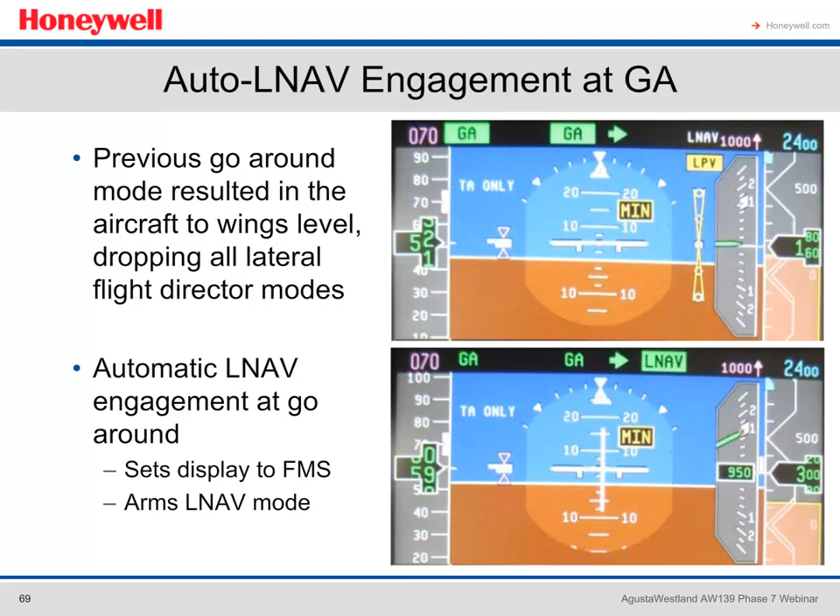Next up is Required Navigational Performance, or RNP. In this section, I'd like to discuss not just the Phase 7 improved graphical display of RNP and EPU information, but review terminology, RNP concepts in general, and provide a bit more detail as to how RNP functions and what some of these numbers mean to you, the operator, in terms of clearances, requirements, and capabilities.

RNAV is the method of navigation that permits aircraft operation on any desired flight path within the coverage of ground or space-based navigation aids, or within the limits of the capability of self-contained aids, or a combination of these. An RNP is RNAV operations with onboard navigation alerting and monitoring, to identify for the pilot whether the operational requirement is or is not being met during an approach.

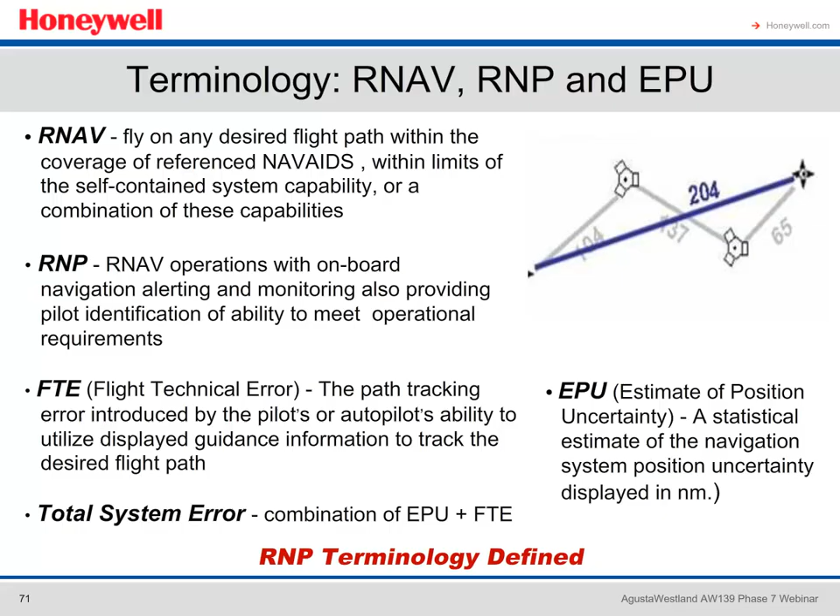FTE is the flight technical error, which is the path tracking error introduced by the pilot's or autopilot's ability to utilize displayed guidance information to track the desired flight path. Total system error is the combination of EPU plus FTE, and EPU is the estimate of position uncertainty, which is a statistical estimate of the navigational system position uncertainty displayed in nautical miles.

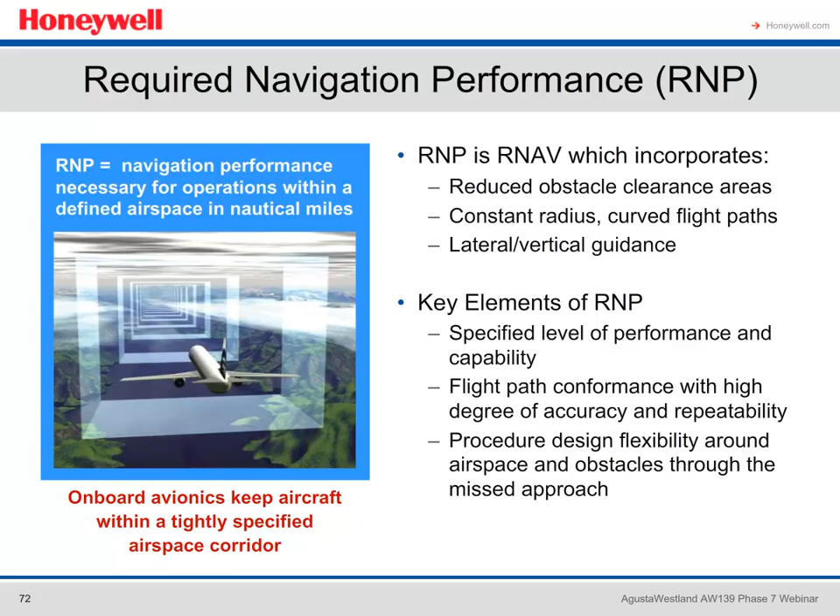Now let's review the RNP approach in general. An RNP is essentially an RNAV approach. It provides additional level of precision, flight path repeatability, and procedural design flexibility. Aircraft with RNP capabilities have onboard avionics with the capability to keep the aircraft within the airspace specified by the RNP requirement. This approach type provides a number of advantages to both pilots and controllers due to the design flexibility, accuracy, and repeatability, which allows precision type approaches on a lateral level around either congested airspace or difficult terrain.

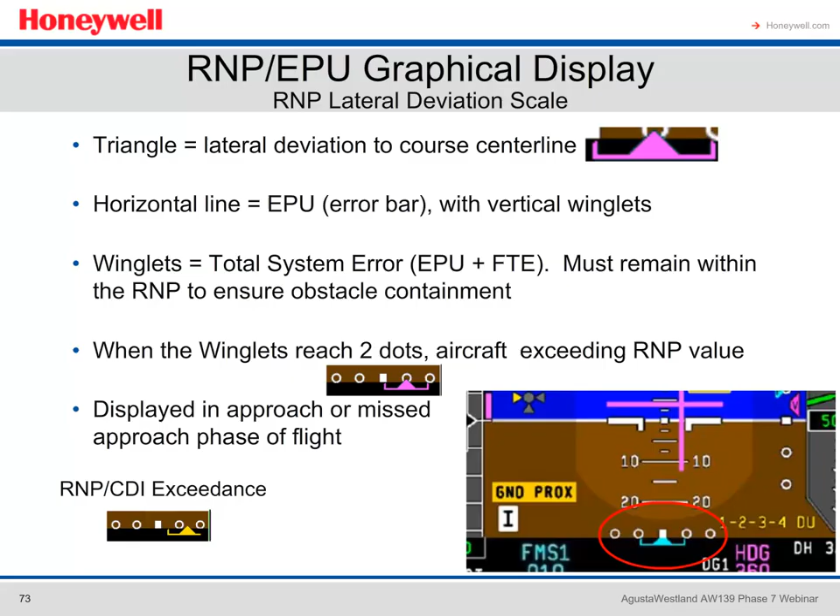So let's talk about the improved graphical display of required navigation performance, or RNP, and estimated position uncertainty, or EPU, for FMS approaches. The center triangle represents the FMS lateral deviation to course centerline. The horizontal line represents the EPU as an error bar with winglets, or vertical lines, which indicate the sum of the EPU and flight technical error, or FTE, which must remain within the RNP to ensure obstacle containment. When the EPU error bars or winglets reach 2 dots, the aircraft would potentially be exceeding the RNP value. Error bars expand and contract depending on the uncertainty level. This RNP lateral deviation scale, as it is called, should be displayed in the approach or missed approach phase of flight. Below, in this slide, is an example of an exceedance.

Even though the flight crew can monitor the individual contributors to lateral position error, it is the total system error that must be monitored to ensure the aircraft is meeting the required navigation performance. It is important to know that the EPU cannot be controlled by the pilot. The pilot can only control the aircraft's position to the centerline of the approach, or flight technical error, FTE. The TSE is the sum of the EPU and FTE. The TSE is displayed as the lateral deviation of the winglets to the CDI centerline, as shown in the depiction.

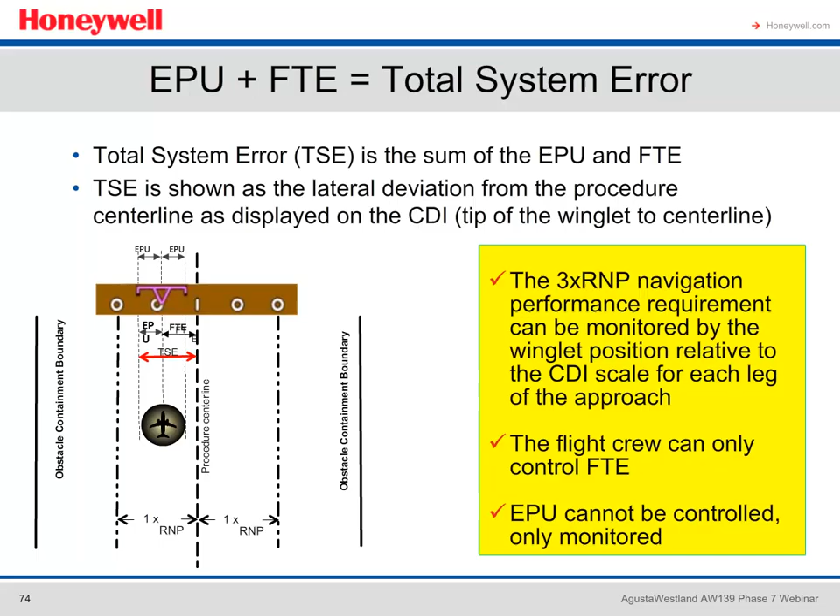Note that the AW139 is not certified or capable of conducting RNP AR approaches, which require additional equipment as well as FAA and pilot certification. AR, or Approval Required, RNP approaches are capable of an even tighter accuracy, but since this is not a topic for the AW139, I will not cover it in this webinar. It's worth understanding that an RNP procedure can be differentiated from an RNP AR procedure by the chart name: RNAV GPS for our RNP on the AW139 versus RNAV RNP for an RNP AR.

The RNP value indications are still displayed with Phase 7, in the same place to the left of the HSI, when the following occur: when the FMS is selected as the primary nav source, when the FMS indicates the Mark on Target, or MOT, maneuver is inactive, and the ICAO reference, path identifier, and LPV annunciator are not displayed.

The RNP lateral deviation scale, along with the RNP EPU lateral deviation pointer, will be displayed near the bottom of the ADI sphere on the PFD when the following conditions are met: when LNAV is engaged on the on-side flight director, when HSI is in full compass or arc mode, when the FMS indicates that MOT is not captured, and when the aircraft personality mode, or APM parameter, indicates that the RNP limits display is enabled.

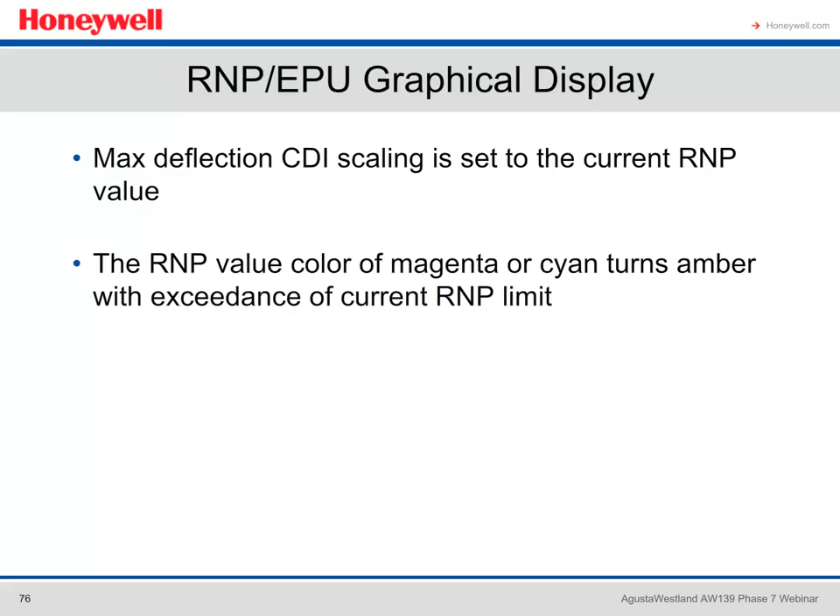To review, the maximum deflection scaling is adjusted per the RNP values set in the FMS, and the RNP lateral deviation scale color will be magenta or cyan depending on the source, and turns amber if the EPU and FTE exceeds the RNP limit.

In summary, the FMS incorporates the RNP concept to monitor and annunciate the performance of the navigation function. For each phase of flight, a default RNP value is defined but may be edited for certain procedures or airspace. That editing can be accomplished via the RNP page through FMS Progress Page 2. To fly RNP approaches, the pilot must ensure the aircraft maintains the required RNP throughout the approach.

And finally, the AW139 is not certified or capable of conducting RNP AR approaches, and an RNP procedure can be differentiated from an RNP AR procedure by the chart name, which is RNAV GPS versus RNAV RNP, the designator for the RNP AR. That concludes the RNP section of this webinar.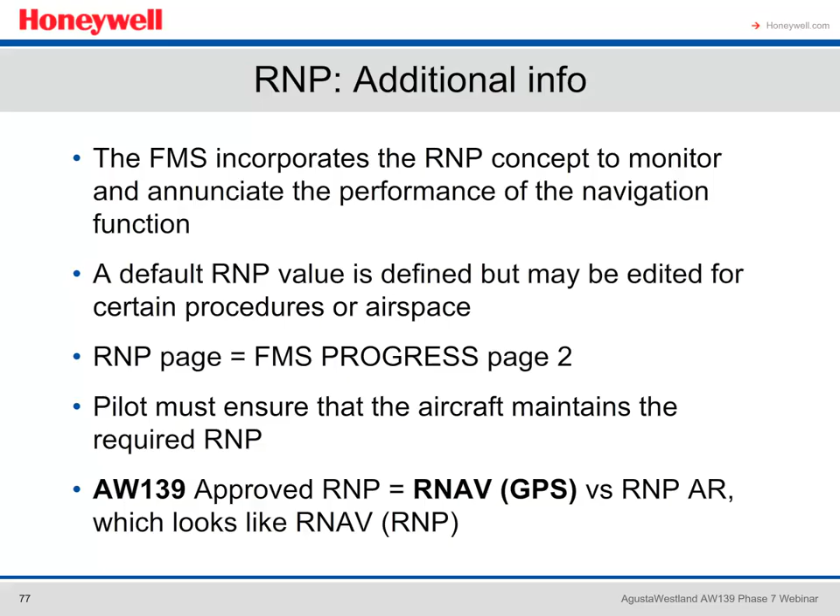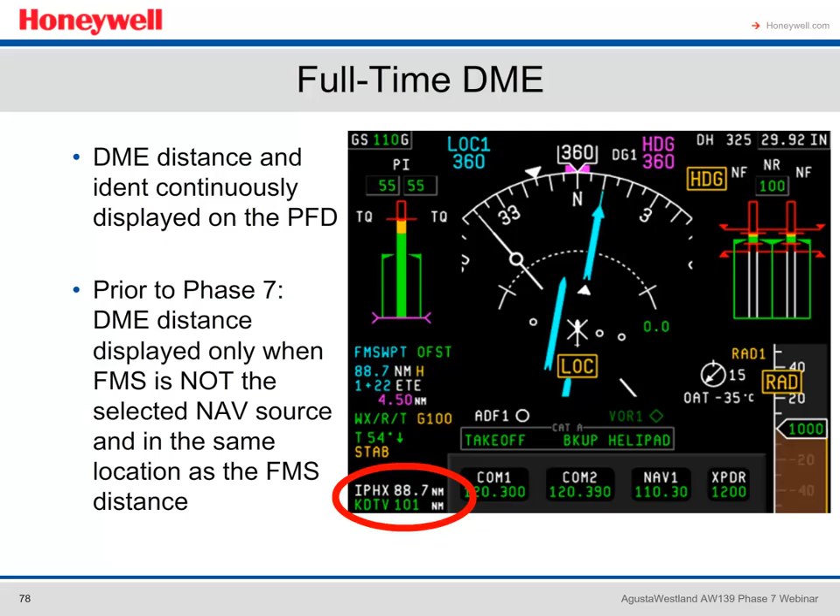Another additional feature provided with Phase 7 is full-time DME capability. DME distance and ident are displayed on the PFD regardless of whether or not the FMS is the primary navigation source. On aircraft prior to Phase 7, DME distance is displayed only when FMS is not the selected nav source, and in the same location as the FMS distance.

Additionally, Phase 7 has added SAR and offshore inhibits to optimize EGPWS functions for oversea operation. Tail strike alerts are reduced by improving the existing performance curve based on actual performance. Nuisance alerts over water are reduced by providing additional position integrity labels, which allows the EGPWS a more accurate altitude calculation. And the too-low-gear oral, which duplicates the monitor warning function, is eliminated.

One of the issues faced by operators prior to Phase 7 was that the landing gear oral warning sounds too late for oil rig operations, sometimes only after the aircraft is over the helipad. That software logic uses radio altitude of less than 150 feet AGL as the trigger.

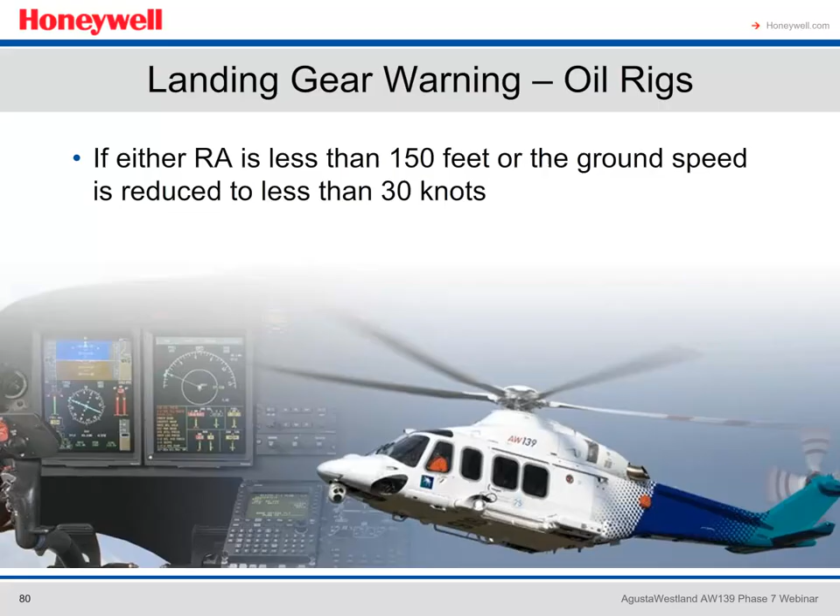For Phase 7, the software logic is modified to monitor the ground speed as well as the radio altitude. Therefore, if either radio altitude is less than 150 feet or the ground speed is reduced to less than 30 knots, the pilot will hear an oral landing gear warning if the landing gear is not down.

As an improvement mainly for maintenance personnel, the collective servo drive can be engaged for testing and operational checks on the ground. On aircraft prior to Phase 7, the collective cannot be driven with weight on wheels, in other words on the ground. Phase 7 provides a CMC test to drive the collective on the ground for ATP support and troubleshooting, and is used to validate collective operation and appropriate levels of friction on the collective control.

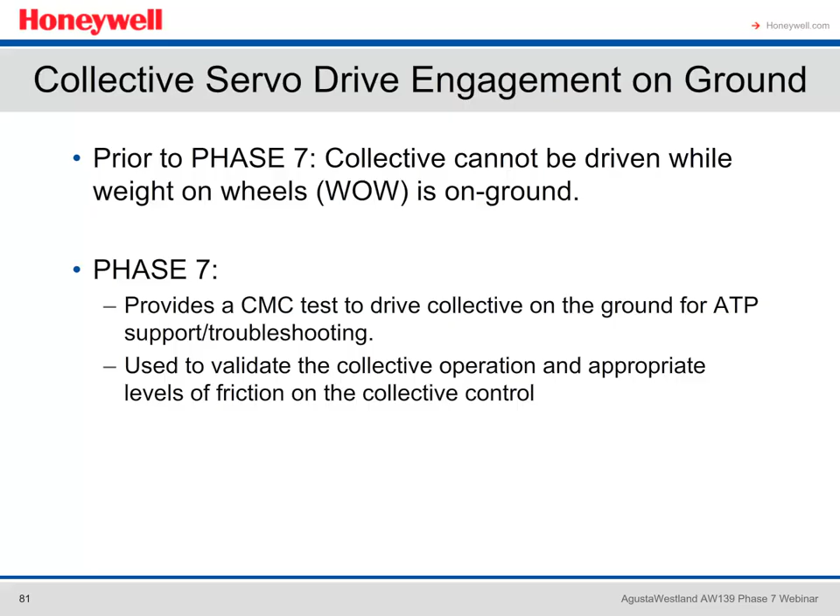So far, we've discussed the main features added for the AW139 Phase 7. In addition to those features, many in-service issues reported by pilots have been addressed.

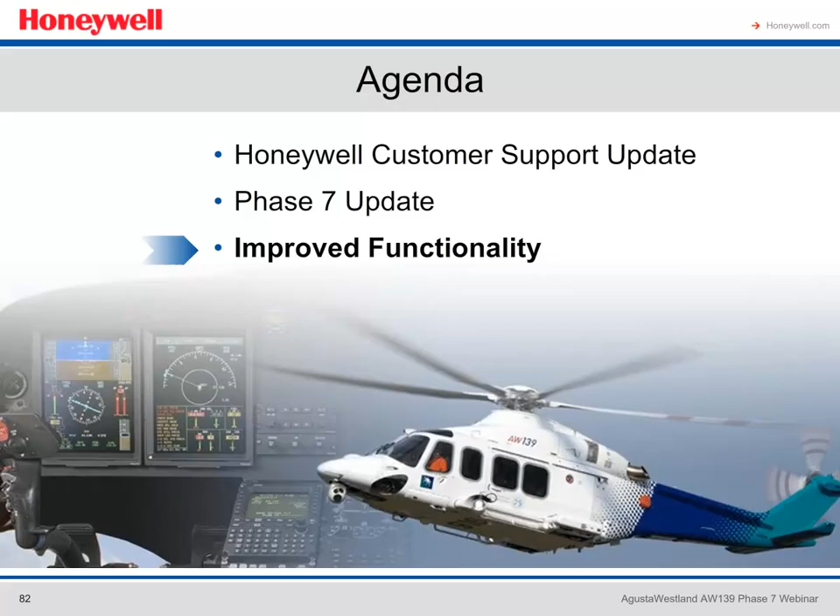Next, we'll look at a list of those. Phase 7 has improved the functionality of previous models by addressing the following issues.

Radar altitude hold mode won't hold altitude, various FMS issues, DC generator and main and auxiliary battery fluctuation, trim issues, decision height flashes and goes invalid, ILS offset, fly-up collective safety activation, and avionic fault CAS message.

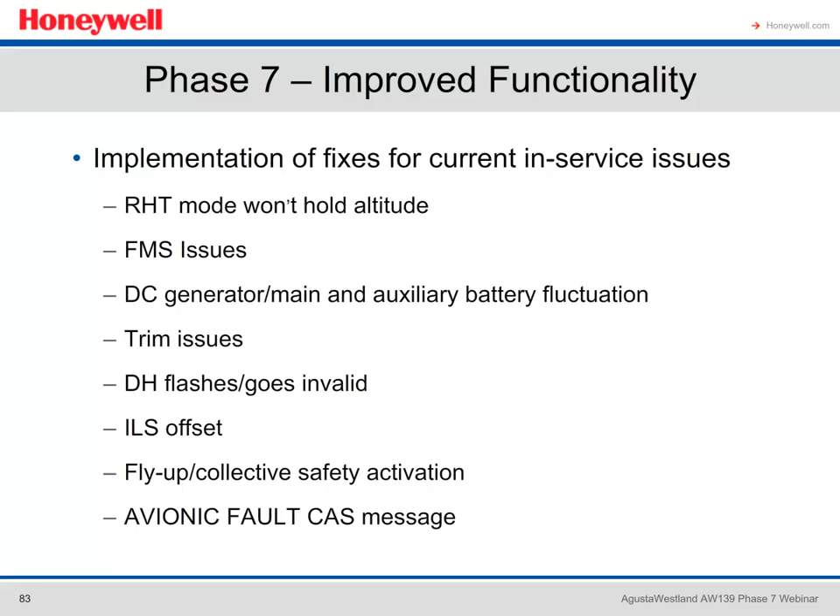More details and a summary of each fix follows. Radar altitude hold, or RHT mode. Operators have advised that radar altitude hold mode does not hold altitude in some circumstances. Upon reaching selected altitude, the aircraft may slowly depart from that altitude and in some cases continues until the oral altitude call-out is heard. Honeywell Engineering found a bias in the acceleration feedback, which has been corrected in the AFCS software.

In this slide is a list of FMS software issues addressed and corrected for Phase 7, along with the Honeywell Service Information Letter, or SIL, numbers as a reference for more information about that particular issue. At the bottom of this slide is a website address for online access to these Honeywell SILs. In addition, you can access SILs on our Pilot Gateway site referenced in the beginning of this webinar. We'll pause here for a few seconds to allow for screenshots for future reference.

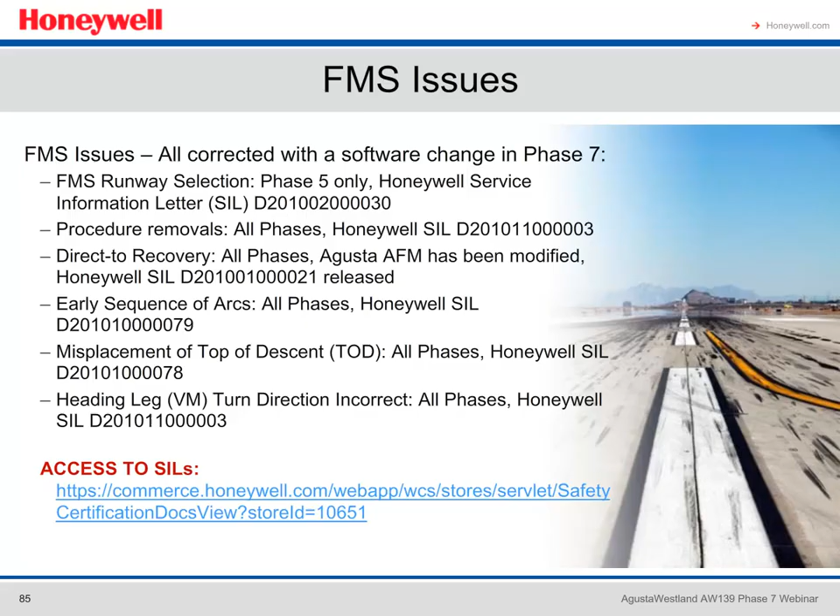Another issue reported from operators is one concerning DC generator values flickering. Operators were seeing fluctuations of the DC generator values when the current value was close to 0 amps. They were also reporting false DC gen caution CAS messages. Honeywell Engineering discovered that the input values were similar in magnitude in millivolts to noise, and the existing software was unable to evaluate that input. The fix improved the software to better filter that noise.

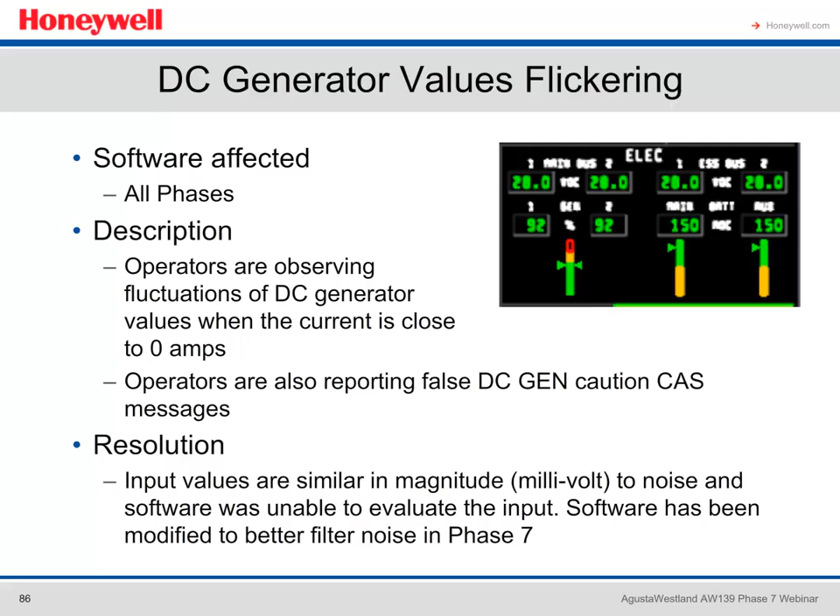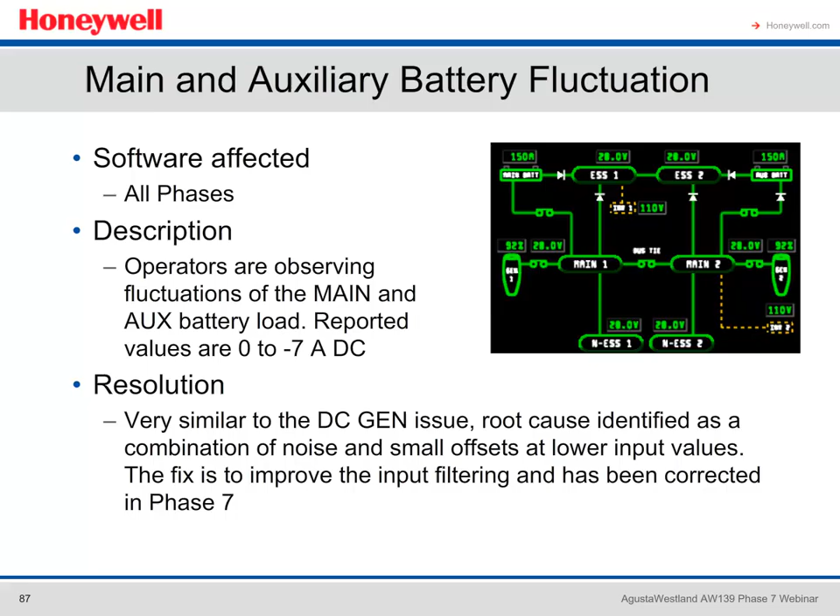Similar to the issue with flickering generator values is the issue with the main and auxiliary battery load fluctuations, reportedly fluctuating between 0 to -7 amps DC. Similar to the DC gen issue, the root cause was identified as a combination of noise and small offsets at lower input values. So we improved the input filtering, and that has corrected the problem.

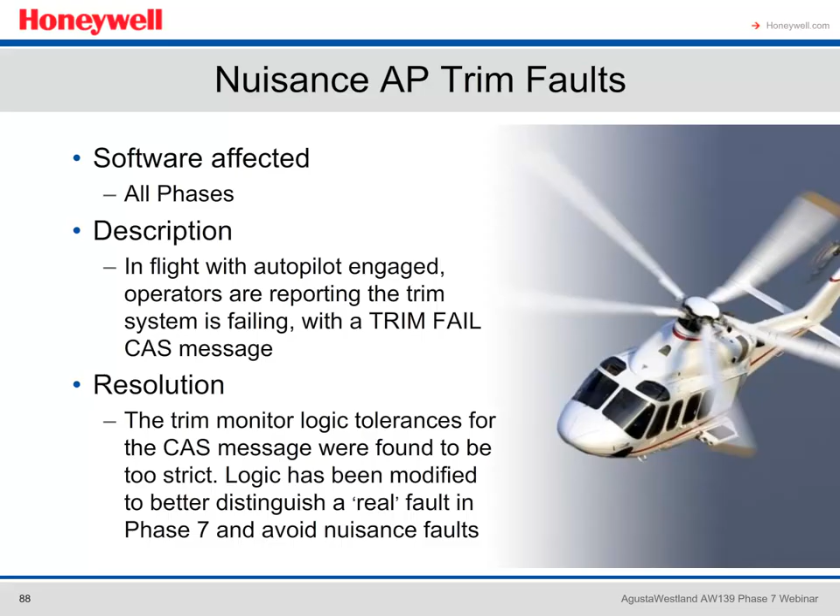In this issue with trim faults, operators reported that the trim system was failing with a trim fail CAS message in flight with the autopilot engaged. Honeywell Engineering discovered that the trim monitor logic tolerances for the CAS message were too strict, so the logic was modified to better distinguish a real fault and avoid nuisance faults.

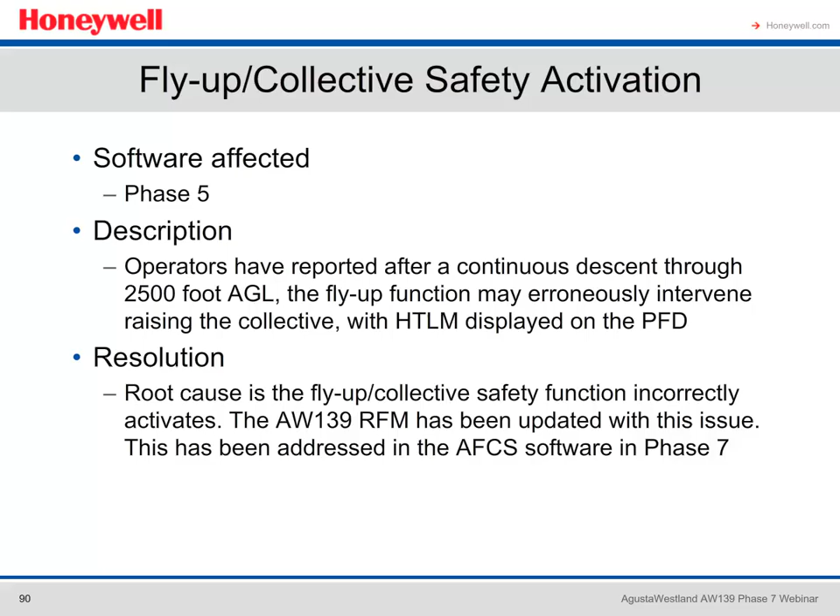The issue with the in-flight collective was reported by operators after a continuous descent through 2,500-foot AGL. The fly-up function was reported to have erroneously intervened, raising the collective with height limit, or HTLM, displayed on the PFD. The cause was that the fly-up collective safety function was incorrectly activating. The AW139 RFM has been updated with this issue, and it is addressed in the AFCS software for Phase 7.

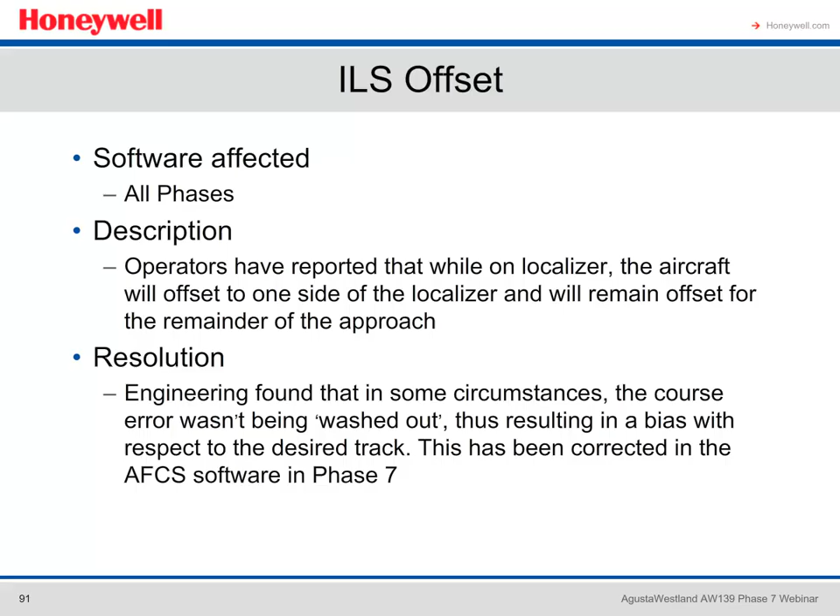The commonly discussed ILS Offset has also been addressed and corrected in Phase 7. Operators have reported that while on the localizer, the aircraft will offset to one side of the localizer and will remain offset for the remainder of the approach, regardless of pilot inputs. Honeywell Engineering found that in some circumstances, the course error wasn't being washed out, thus resulting in a bias with respect to the desired track. This has been corrected in the AFCS software for Phase 7.

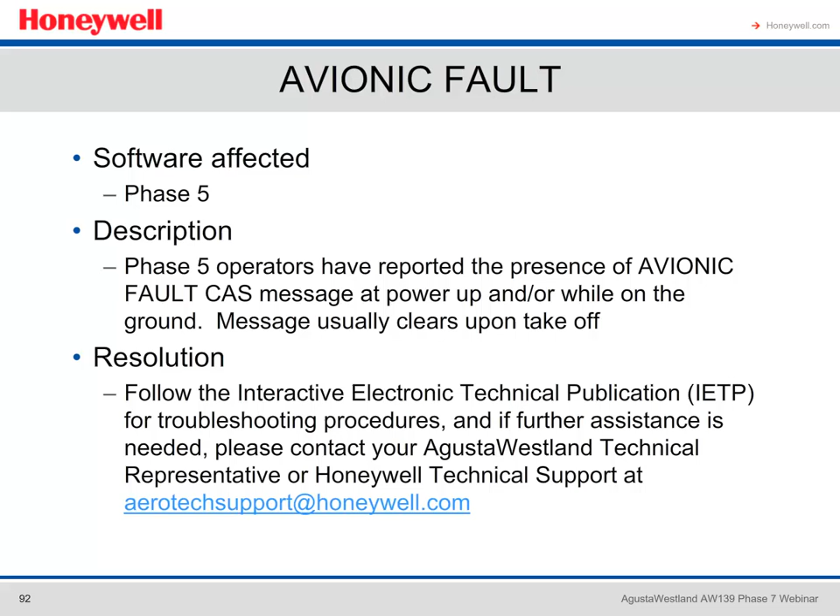Finally, there has been an issue reported with an avionic fault CAS message appearing at power up on the ground, which would clear up upon takeoff. To address this problem, Honeywell and AgustaWestland recommend following the troubleshooting procedures from the Interactive Electronic Technical publication. If further assistance is needed, we recommend you please contact your AgustaWestland technical representative or Honeywell technical support at aerotechsupport@honeywell.com.